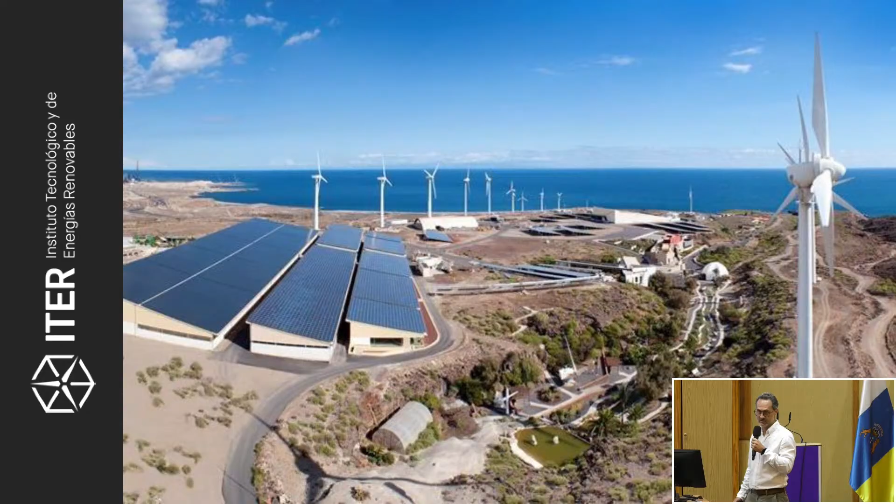We at ITER, I'm gonna start with an introduction of what is ITER for the people who don't know still who is ITER, and that may be a lot of people. And then we are going to focus on what we do at the Robotics and Automation Unit at ITER, focused on renewable energy. For those that don't know, ITER is a technological institute. It's a research and development center located in Granadilla de Abona, Tenerife, south of Tenerife. And nowadays, it represents the main institution of public research, along with the University of La Laguna in Tenerife, in terms of renewable energy.

We are 180 people working there, and we started mostly with renewable energies. Our core is renewable energy, but we have expanded through the last 10 years to other fields or areas. And right now, we not only work on wind or PV energy or storage, but we also have several lines of activity in ICT, sustainable architecture, genomics, and environmental sciences. And one of the last ones that has been started is robotics, that we started in 2018.

Okay, so as I said, our core is renewable energy production. We manage over 40 megawatts of solar power and 60 megawatts of wind power energy. And we do the operation and management of those resources. At the same time, we have a very unique smart grid at the facilities of the Granadilla site, because we have lots of different types of consumption, production, and storage units. So it's a very good place to validate technology in there, because we have low-level control of everything. For example, we produce our own solar inverters. We have very low-level control of everything, up to the electrical signals.

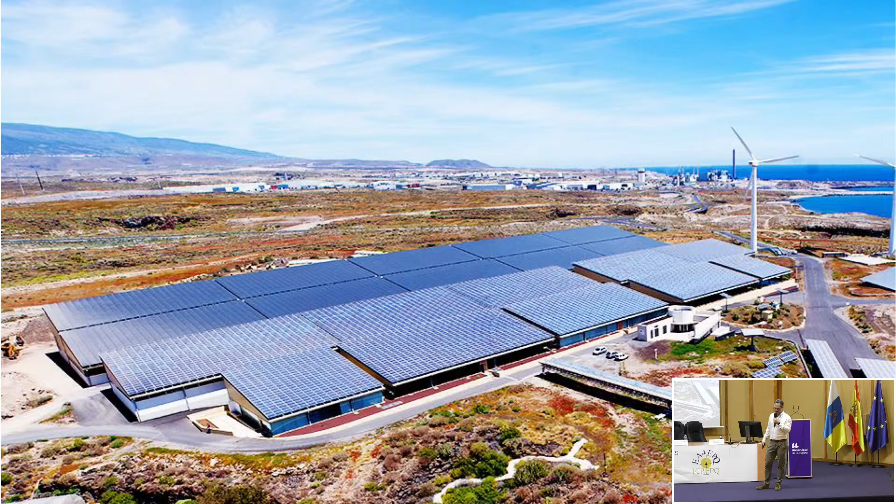So, well, these are the main new wind parks that we have installed, three of them in 2018, and 3 of them were before that and are at the end of their life, 25 years, 35 years of production of wind energy. It was the first wind energy park installed in Tenerife. And right now we are working on repowering, doing the whole reinstallation of all the wind turbines on those three parks. Also, we have deployed 40 megawatts of solar power.

Those that are showing there are in the Granadilla site. These are offices below there and storage sites. And also, this is really beautiful. It's the bioclimatic house residential area that is also located in the Granadilla site, and it's also a living lab that is completely equipped with lots of sensors to measure information about the conditions of the people staying there.

And well, as I said, in 2018 ITER decided to create a robotics unit, and I was chosen to be the leader of that unit. It's focused on robotics and automation. We started with what people normally think about robotics, physical robots. We started doing that at the very beginning, but as time has gone by, we have oriented towards the application of artificial intelligence, because it's what is more applicable to renewable energies right now, and is what the market and the requirements of the business or the entity were focused on.

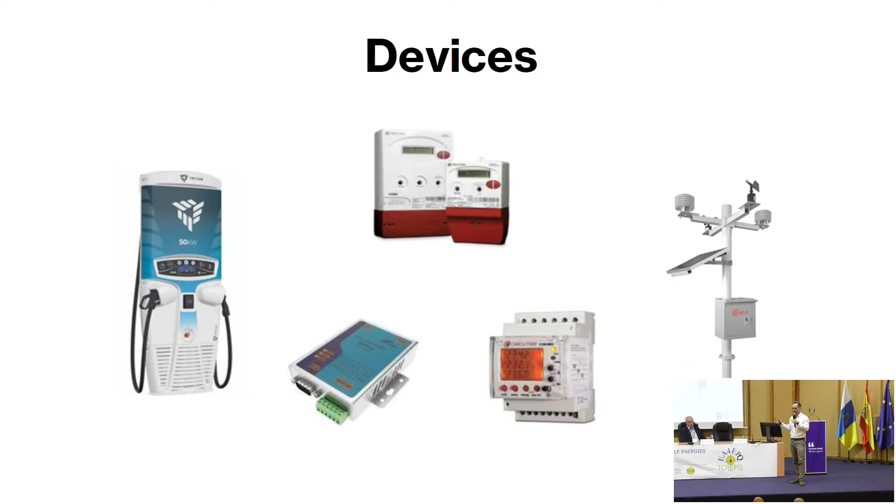What we faced was very different devices. EV chargers, energy meters, different gateways, different network analyzers, meteo stations, water meters, any type of environmental sensor you can think of. It was very difficult to gather all that information and to speak to all these devices with different protocols. But for us, the work was trying to connect with them. I mean, once we connect with the device, everything will be clean, everything will be transparent, and we will transfer the information in the same way to the system. Information and data will be stored, and that information will be available with the same endpoint, with the same interface, independently from what the device is.

So you can imagine what we had in mind at that time, more than 1,500 devices that we had to put all together in one place. So what did we decide to do? Well, we started what was a project at that time, and now it has become a service of the entity, where we do all the data acquisition, monitoring, and visualization of data. It is what we call right now Nexo, and there is a list there of all the things that we gather information from. Okay, so right now, as I said, more than 1,040 devices, more than 65,000 variables, and it's generating nearly 10 million messages an hour. It's a massive amount of data.

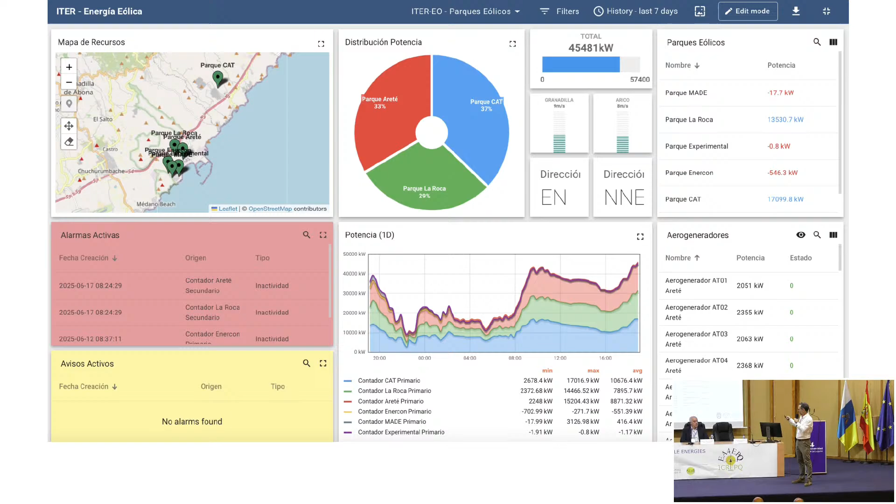And then we go from high level in terms of plant to low level, in this example, into the wind turbine. So we get a view of the whole plant and then go deeper in the analysis, up to the wind turbine. This wind turbine information is gathered through another external SCADA.

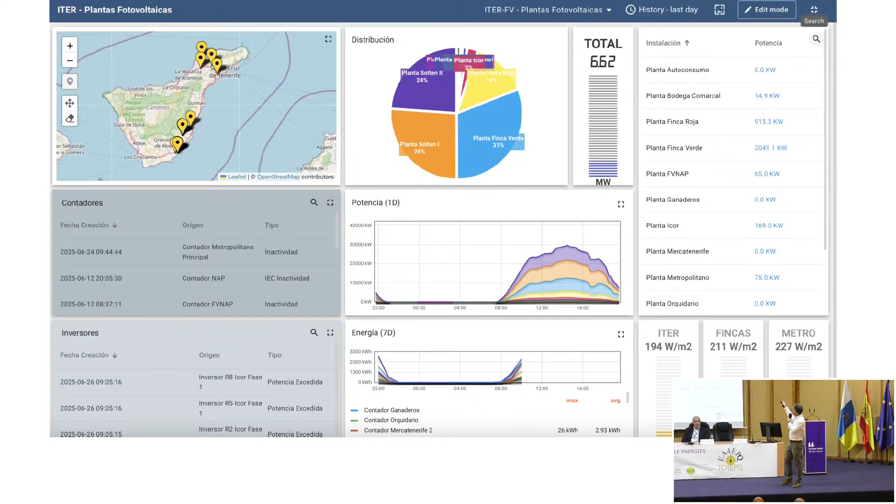For example, on photovoltaics, we have the same view as you saw before in wind energy: we see all the distribution, all the location of the park, all the incidents or issues, production of the last day, of the latest week, and also real-time resource availability and production. Then if we go inside one of the plants, we can see meters, we can see rooms, as we call casetas, where we store the inverters. We can see the status and the production of every inverter. And we can see 3 days of power production.

And it's very interesting because we see at the same time the resource, the production, the estimation of production, ideal production, and also the limitation that the energy operator provides us. Here in the Canary Islands, we have a very big problem with power limitations right now. Right now we are at about 17 to 20% limitation of power. And this is a big issue for power producers, as ITER is. In the case of the PV, we also can see internal information of the inverter because we manufacture our own inverters, so we have low-level access to every electrical data.

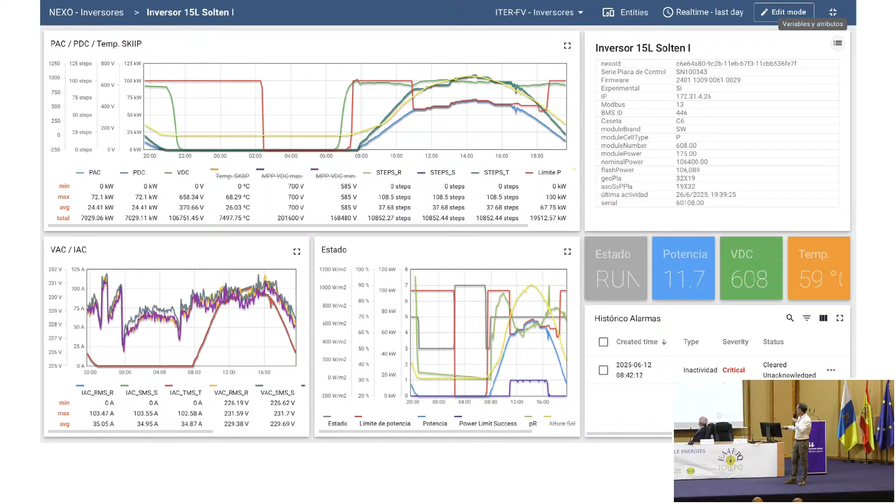And I'm going to focus on this one because it is very related to some work that the University of La Laguna is doing. This is the production time series of an inverter, but at the same time we see the resource that is in yellow, and we have been working in the last 3 months on performing PR calculation on a minute basis. It is normally made on a daily basis; we are doing it on a minute basis. And this information is becoming very interesting for us because we do not have to wait until the next day to know if the inverter is having a good performance, independently from the solar irradiance. We can know that in real time. And we are getting very good results, and maybe we're going to work on publishing a paper on that methodology.

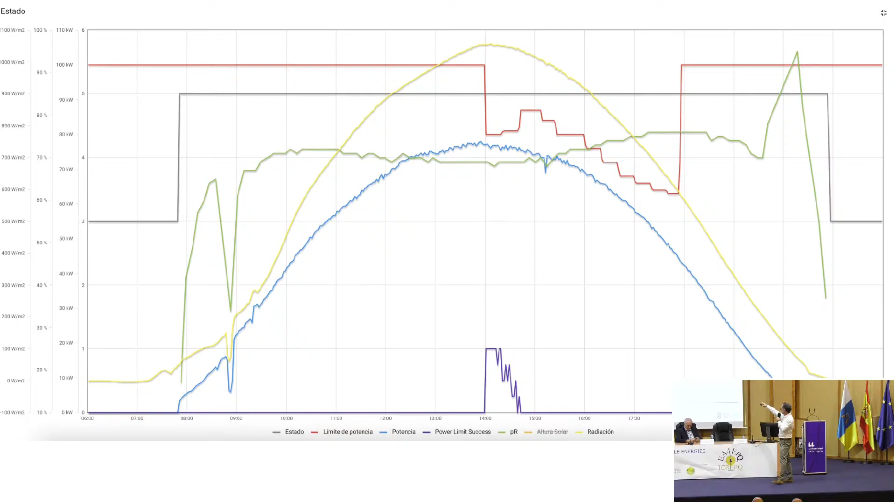As you can see here, the other signals are the limitations and production. As I say, the green one is the PR. Also, we gather information from weather stations. We have here a comparison of all the weather stations that we manage. All those charts that you see there are expandable, so we can see them in full screen. And we can compare the wind resource or the solar irradiance resource in every site where we have a plant or a park.

Also, we get data from outside. I mean, we get data from the operator. We get open data from the operator, so we can simultaneously see what we are producing, what the energy demands are, and also what the energy distribution is producing right now. So it's very important for us to know what's happening outside, to know if we are going, for example, to receive any limitation. That is really useful. And we support that analysis on open data provided by Red Eléctrica de España.

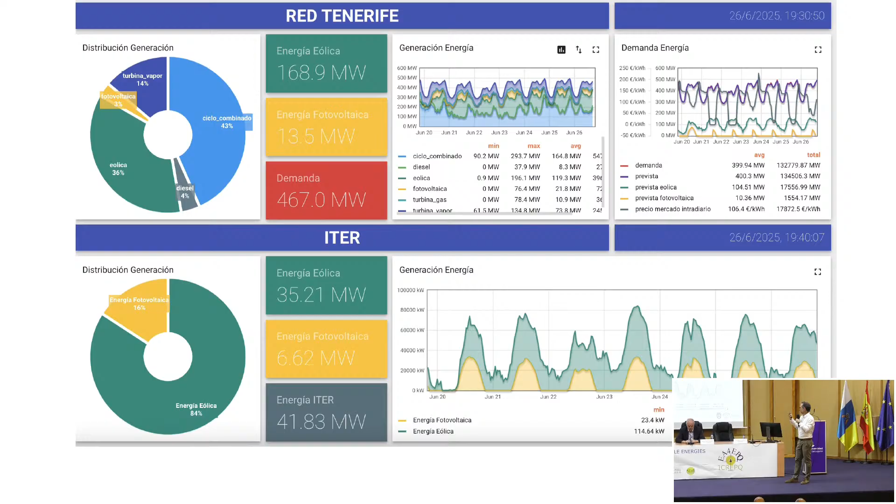This is another panel that is mostly for dissemination purposes, but it shows our production during the last year, during the last month, distributed by technology, by plant, and also with some indicators. And there is one big indicator here: right now between 25 and 30% of the energy produced in Tenerife is produced by ITER. Renewable energy, not the whole energy. But in terms of renewable energy, nearly 29% is produced or managed by ITER.

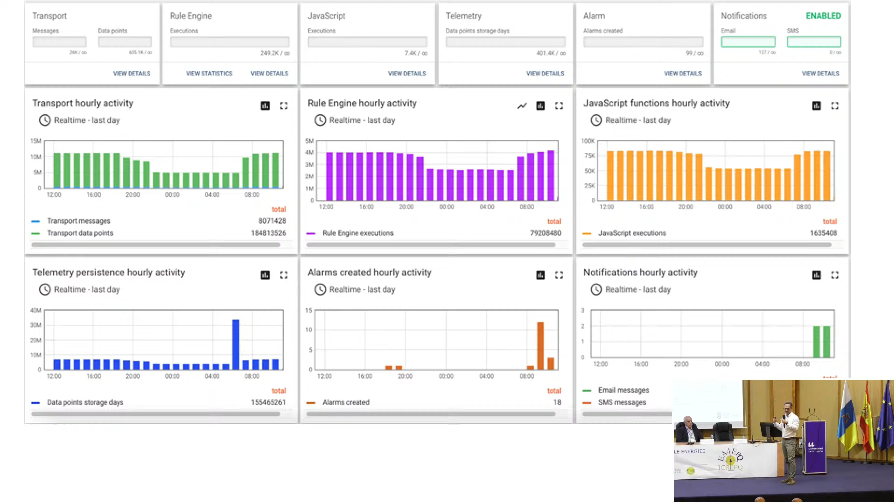This is a screen that tries to show the amount of data that we are handling right now. As I said before, we have lots of data. Normally we are at about 8 million messages per hour, and at some times of the day we have peaks like that because we receive lots of data at specific times. But it's manageable. Our system can accept 25 million messages in just 1 hour. And it could accept much more than that, because thanks to our own HPC infrastructure, we can scale.

Now I'm going to focus on the data exploitation, okay? Delphos is a project about forecasting of all the energy-related time series. Red Eléctrica de España imposes that any energy provider with an installation of more than 1 megawatt has to provide a 48-hour production forecast of that installation. So right now we are generating on a daily basis 70 1-hour forecasts of wind and solar energy production.

And you can see in the dashboard, well, here it's all mixed because we need to do this visualization. Here you see the real power. Here is forecasted power, using different models. There are different machine learning models that we use, and on a weekly basis we compare all of them. We compare the results and we balance the use of them. So it's not all the time using the same model. We combine them. And this view is very interesting because we can see what we expected to produce today, what is expected to be produced during this week, and what is expected in real time, okay?

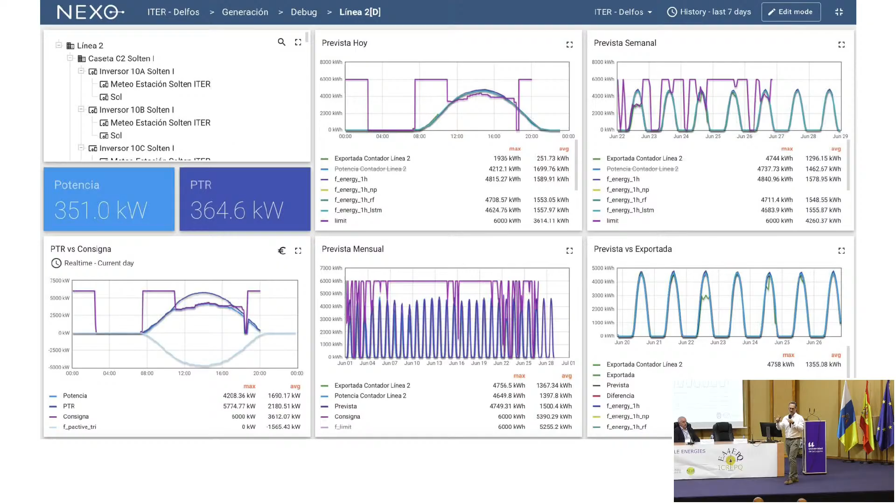And this is a big issue because the bigger the difference with the forecast, you get economically penalized. So if the difference in the forecast is very big, you get a penalization. And that penalty is becoming an issue. It's quite a lot.

Here you can see in detail, and this is the limitation. The forecast is the purple one, and the production is the green one. So in terms of solar, we are doing very good work. In this graph, for example, this is a week. The only day that we had a big difference was due to a limitation, not due to a forecasting problem. So in this area right here, we don't get penalized, because it's an external limitation. What we get penalized for is this type of thing. This, for example, may be a 3-hour cloud that we didn't expect to appear. The difference is very small, but it's important.

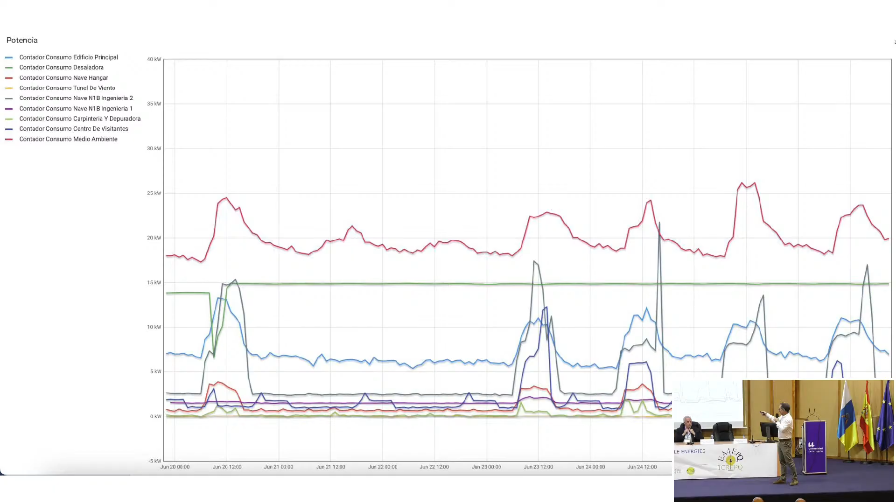And also, we do forecasting on consumption. This is also very nice because we can estimate 48 hours in advance if we are going to have lots of consumption. And our consumption profile is mostly related to air conditioners, because most of our facilities are bioclimatic, but some of them are not. So we need air conditioning mostly on summer days. But here we have a combined forecast of all the consumption points in the area.

Another thing that we also do in the robotics and automation unit is aerial inspection of wind and photovoltaic energy infrastructure. We use drones to get data, not in terms of time series, but in terms of images, mostly using thermal imaging. We use this type of drone. We do periodical flights through the whole installation of PV plants.

Flying one PV plant takes about 15 minutes. We need to fly around 450 PV plants during the whole year. It's quite an issue because there are lots and there are distances between them. So we repeat every flight every 2 years. We cannot do more than that with 4 people doing that.

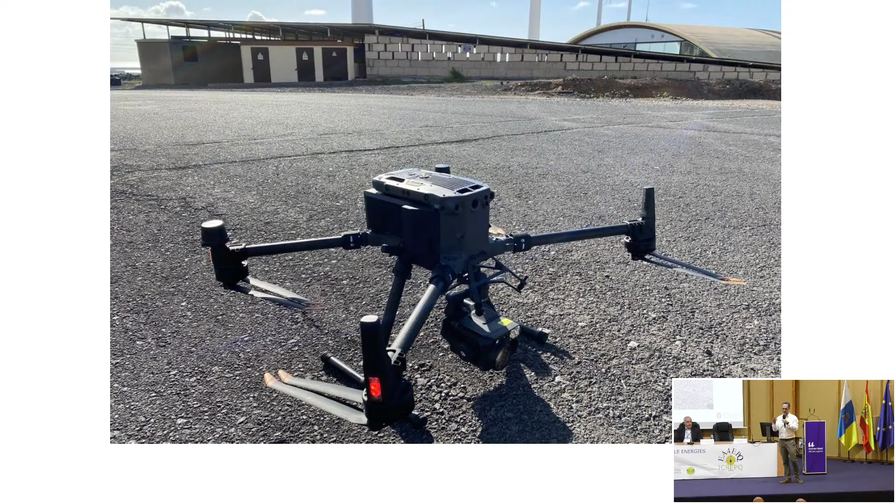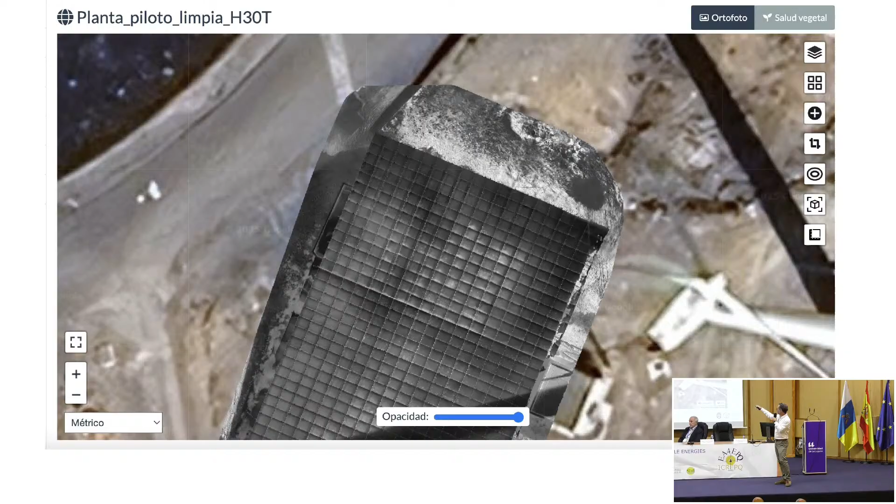Because when the solar radiation impacts the surface, it is different. The irradiation of the panel is different when it's dirty than when it's clean. And we are working on a project that I'm going to speak about later that is focused on this issue.

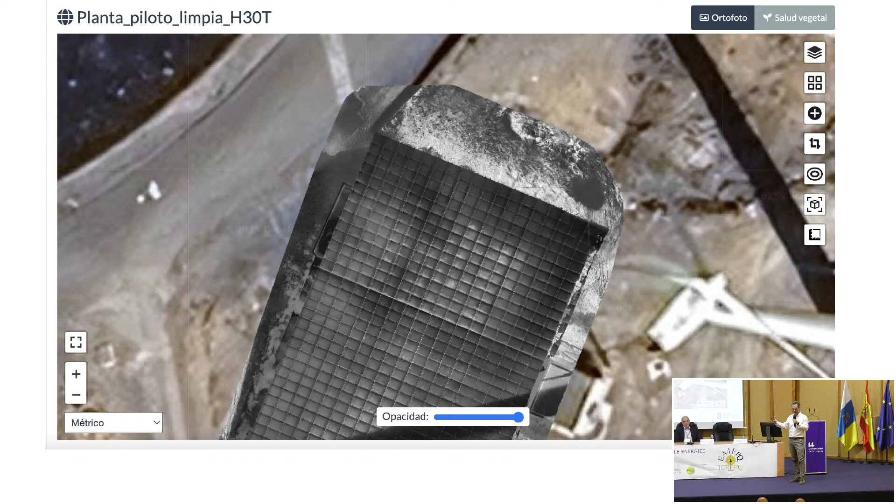We have lots of problems with PV cleaning in Tenerife because we are in a very critical place that has plenty of wind, very close to the sea, with lots of salitre, that is concentration of salt, and that mixed with dust is the worst thing for PV.

We also do the same approach on wind turbines, and we gather thermal and RGB imaging of the wind turbines. There are some studies, and we are also applying it, showing that in some cases you cannot see, for example, breaks in the fiber visually, but if you get the thermal imaging and there is enough heat on the surface of the blade, you can see the break, even if it's not visible.

And we are using it to get in advance to a replacement or a fix of that blade. This is what we are very happy to be working on right now, and I think it's going to be impactful for you. We are applying Gen AI. ChatGPT is the daily basis for most of us. I don't know if it's for you, but for us it's the daily basis using GPTs.

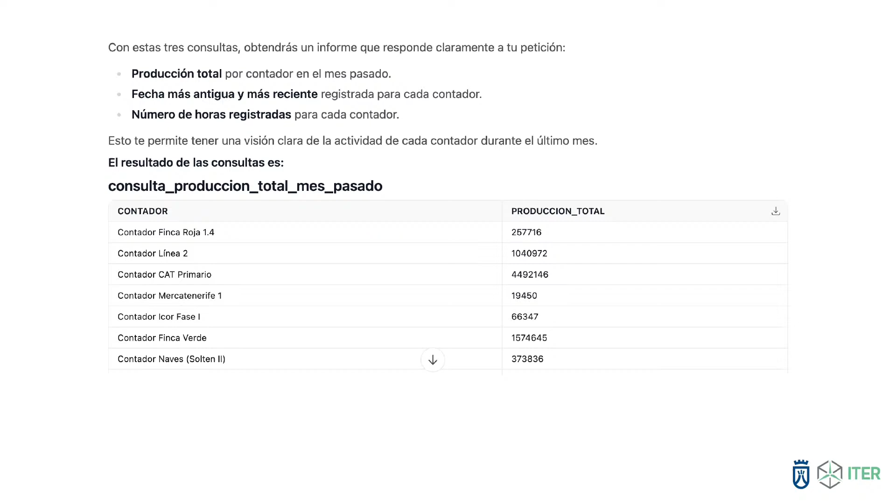It shows us the results of the queries that it has automatically created, and then at the very end, it automatically generates a report of energy production per meter of the last month. And well, it's very long. I'm just going to give you a sneak peek. This is just the introduction. It's a 10-page report.

And well, I wanted just to show you that we have just asked one sentence: total production of the last month per meter. This is the only thing that we provide to the system. And the system answers with a 10-page report with 100% precision. And it's very good because there is no human interaction in here. So these kinds of systems, when they interact with numbers, are very good. And also the conclusions are not bad.

If we are not okay with something in the report, well, okay, we can download it as a doc and we can edit it. But we do not have to build, for example, a monthly report of every installation from zero. So that gives us peace. You remember we were in chaos. Right now we are in peace. Not total peace because there are lots of things, but now, in terms of data, we are in peace.

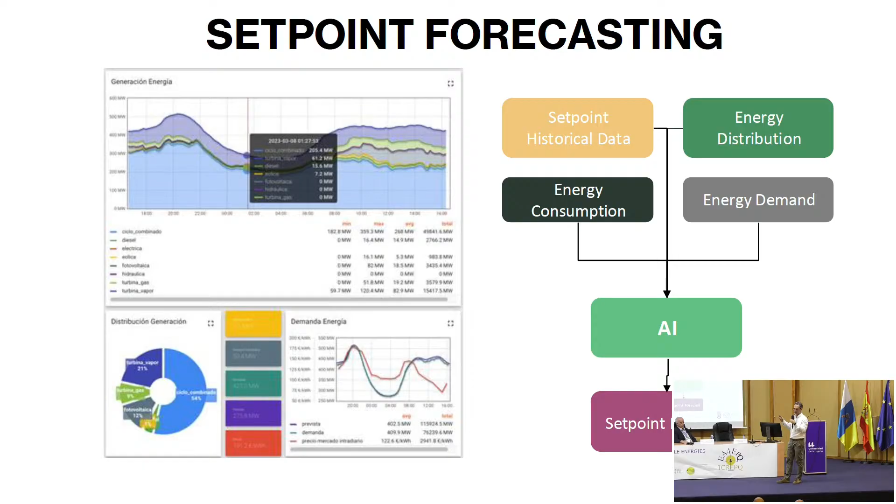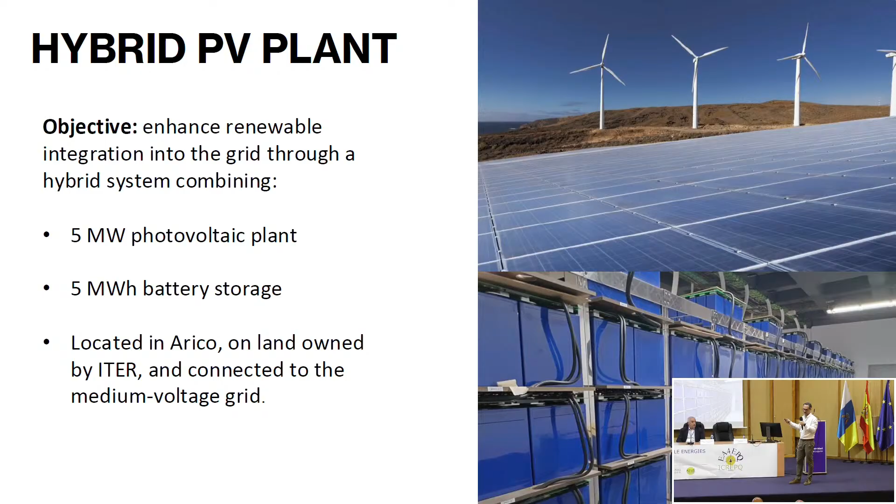Sorry. And then the last two things that we want to speak about is a hybrid PV plant that is going to be installed just before the 30th of December of this year in Arico. It's a 5 megawatt photovoltaic plant with 5 megawatt-hour battery storage. It's going to be the first one installed in Tenerife in hybrid technology. And the last is maybe a big project, an agro-PV plant that we are working on with Cabildo de Tenerife to install a 200 kilowatt peak plant in vineyards in the area of Tegueste. Okay, so that's all. Thank you for your attention.

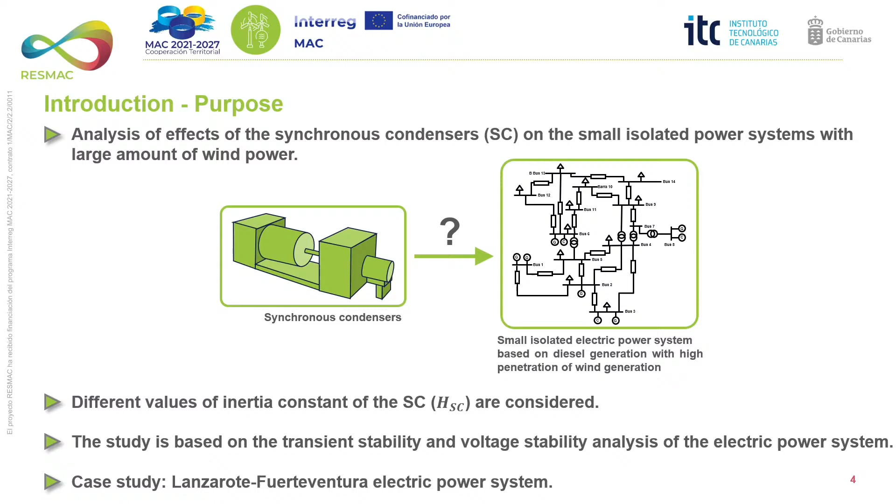The synchronous condenser, also known as synchronous compensator, synchronous capacitor, or SYNCON, is basically a synchronous machine connected to the grid without prime mover or mechanical load. Synchronous condensers have been used in power systems since 1930. However, they have gained importance in recent years due to their capabilities that favor the integration of renewable energy into the electric power system.

Some of those capabilities are generation or consumption of reactive power to help the voltage control in the power system, and the inertial response. They can provide inertia to the power system, as well as contribute to the short circuit capacity.

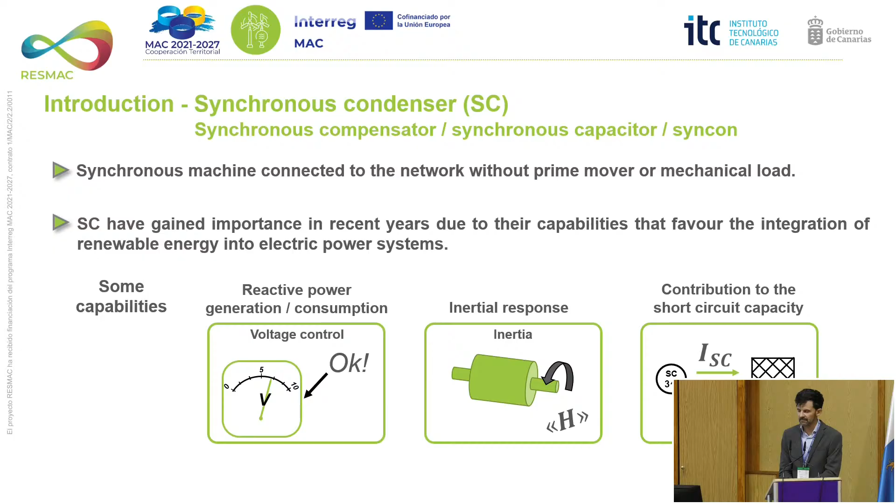The Lanzarote-Fuerteventura electric power system is located on the Spanish islands of Lanzarote and Fuerteventura. The power system on Lanzarote Island is connected to that in Fuerteventura Island by two submarine power cables. There are basically two rated voltages at transmission level, 66 kilovolts and 132 kilovolts. Both islands have a conventional power plant based on diesel generation units and gas turbine generation units. The total conventional power installed is 541 megawatts. The total wind power in the power system is around 97 megawatts.

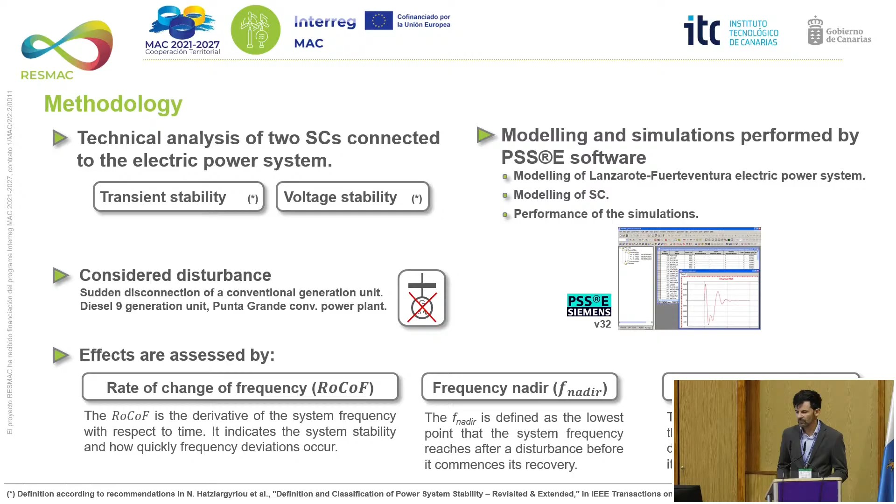The methodology. The methodology relies on transient stability and voltage stability analysis of two synchronous condensers in the electric power system. The modeling of the Lanzarote-Fuerteventura power system and the synchronous condensers, as well as the simulations, were carried out using PSSE software. The disturbance considered for analysis is a sudden disconnection of a conventional generation unit belonging to the conventional power plant on Lanzarote. The effects are assessed by the rate of change of frequency, nadir, and minimum voltage.

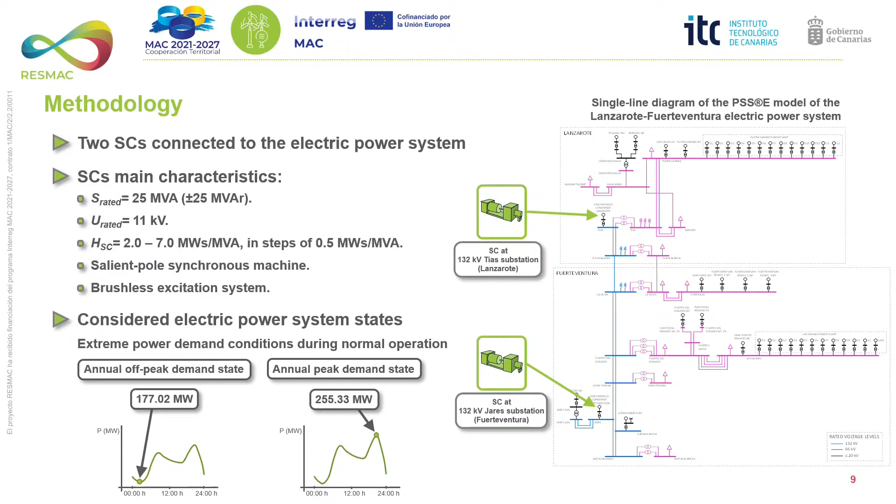The two synchronous condensers are connected to the power system, as you can see on the right side of the slide. One of them is connected to the power system on Lanzarote Island, and the other one is connected in Fuerteventura Island. Synchronous condensers are salient pole synchronous machines with a rated apparent power of 25 MVA. So, the synchronous condenser can inject or consume reactive power up to this value. A range of inertia constant of the synchronous condenser is considered from 2 seconds up to 7 seconds.

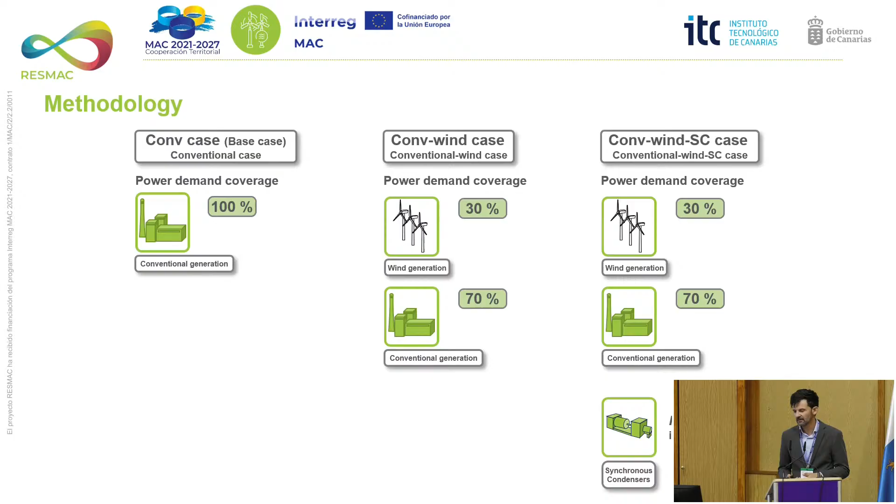The system states for analysis are the stressed power demand conditions in normal operation: annual peak demand state and annual off-peak demand state. So, given the above, 3 cases were studied. The first one is called the conventional case: all of the power demand is covered by conventional generation. The second case is the conventional wind case: 30% of the power is generated by wind generation, and the rest is produced by conventional generation. The last case is called the conventional wind synchronous case: the power demand coverage is the same as the previous case, but synchronous condensers are connected with their different inertia constant values.

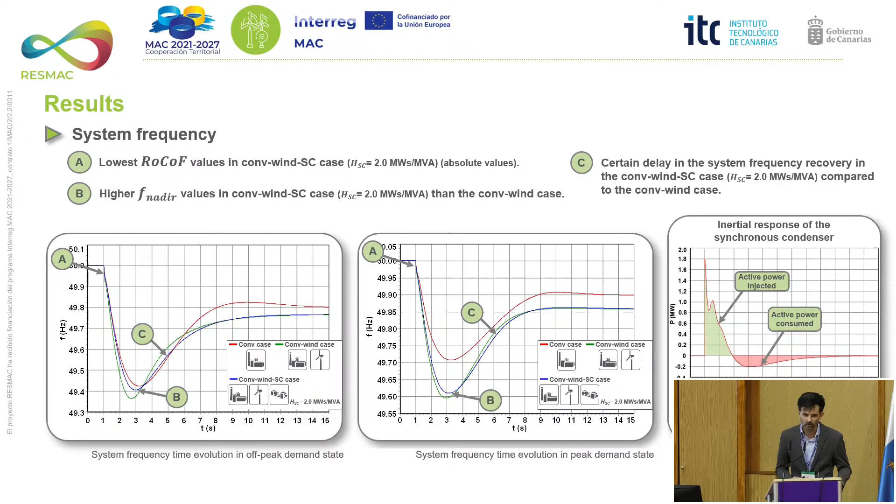Now we can compare the system frequency time evolution for the synchronous condenser case. The results show the lowest rate of change of frequency and a higher frequency nadir for the synchronous condenser case than the conventional wind case. On the other hand, a certain delay is also observed in the system frequency recovery when the synchronous condenser is connected compared to the conventional wind case. This system frequency behavior is due to the inertial response of the synchronous condenser. When the conventional unit disconnects, the synchronous condensers inject active power to the grid from their rotational kinetic energy. After that, the synchronous condenser consumes active power from the grid in order to restore its rotational kinetic energy.

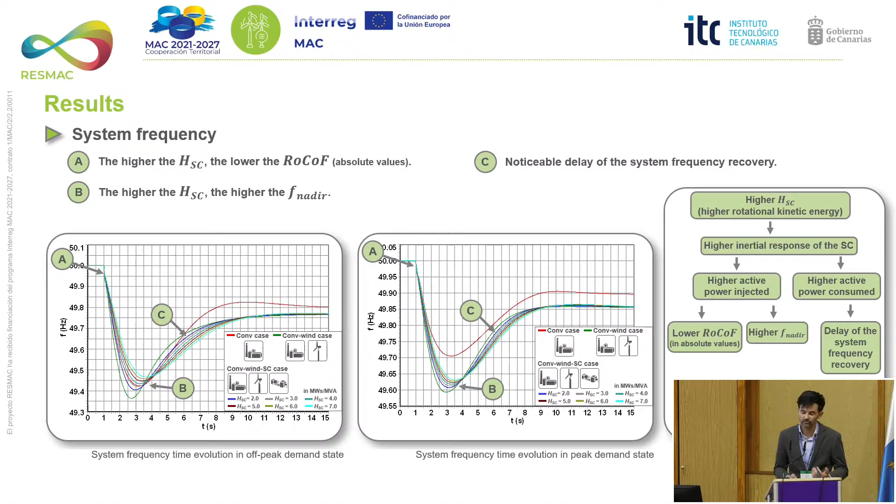The results for the range of inertia constant values of the synchronous condenser suggest lower rate of change of frequency values and higher frequency nadir values when the inertia constant of the synchronous condenser is increased. Besides, the delay in system frequency recovery is more noticeable. The reason is that a higher inertia constant of the synchronous condenser means higher rotational kinetic energy, so the inertial response of the synchronous condenser is also higher, and this produces those results. It should be noted that the relationship of rate of change of frequency and frequency nadir with the inertia constant is not linear.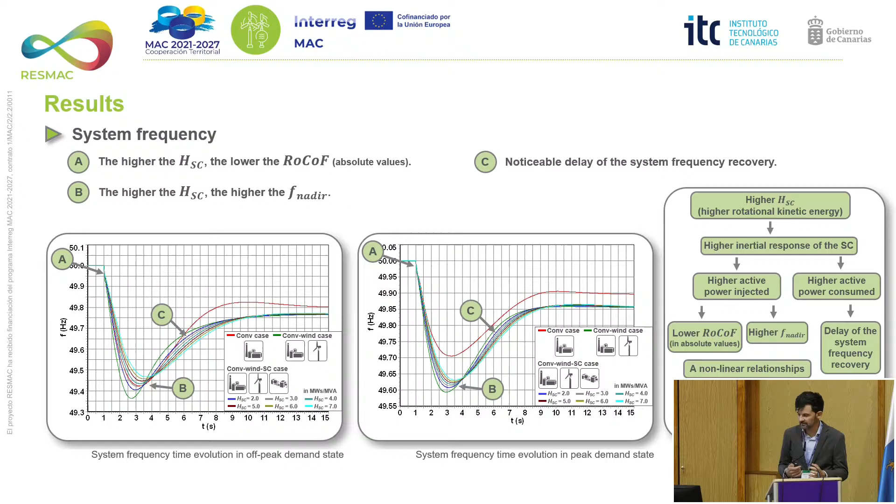It suggests this is not a linear relationship, and suggests the existence of a technical-economic limit for the inertia constant of the synchronous condensers. With regard to voltage, the time evolution for some transmission busbars is presented for both the conventional case and the conventional-wind case.

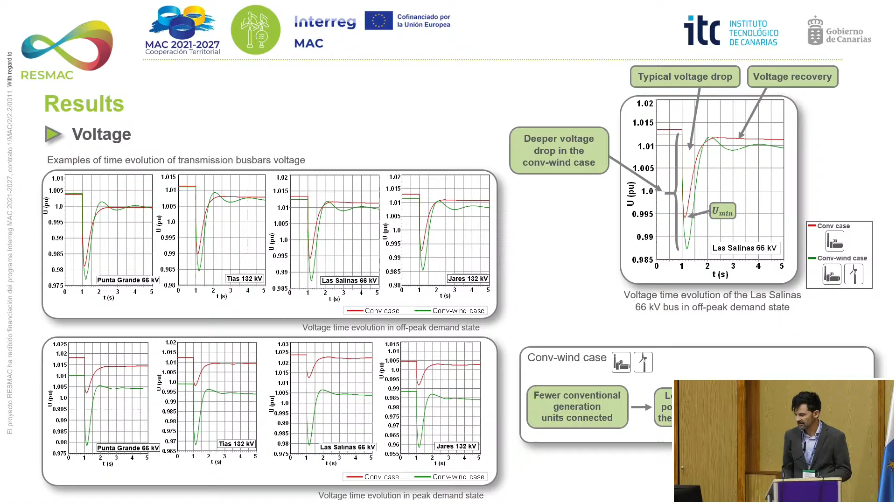When this conventional generation disconnects, a voltage drop appears throughout the small isolated power system. After that, the voltage recovers. The voltage drop is deeper in the conventional-wind case. The reason is that in the conventional-wind case, there are fewer conventional generation units connected to the grid, so it brings lower reactive power control.

The voltage drop is less severe when the synchronous condenser is connected to the grid. Synchronous condensers can provide their reactive power control to the power system. So when the conventional generation disconnects, the synchronous condenser increases the reactive power to support the voltage in the power system, and it causes a smaller voltage drop. Results also indicate that the different inertia constant values considered did not have significantly different effects on the voltage of the power system. The conclusions.

The findings indicate that the synchronous condenser caused a reduction in the rate of change of frequency values, as well as a higher frequency nadir value. Therefore, a reduction in the system frequency excursion can be expected when a disturbance takes place in the power system. A certain delay in the system frequency recovery is also observed, so we must take into account this delay because it may lead to a significant negative impact on the power system.

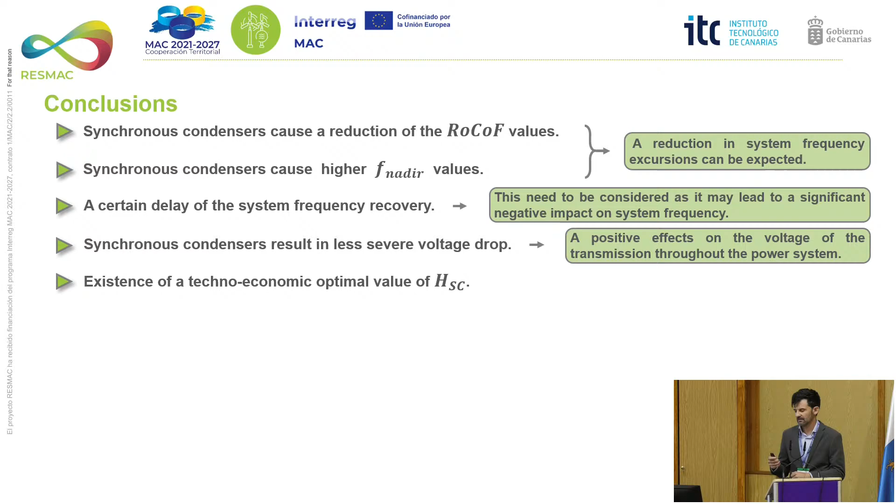Synchronous condensers result in less severe voltage drop throughout the small isolated power system, and the findings also indicate the existence of a technical-economical optimal value of the inertia constant of the synchronous condenser. Based on the positive findings, we can affirm that the synchronous condenser could contribute to the improvement of reliability and stability of the small isolated power system integrating renewable energy. For that reason, the synchronous condenser could be considered for increasing the integration of renewable energy into a small isolated power system.

Possible next steps could focus on the study of the optimal rated power of the synchronous condenser, the optimal value of their inertia constant, the most suitable location for these devices, and analysis of other disturbance conditions in the power system.

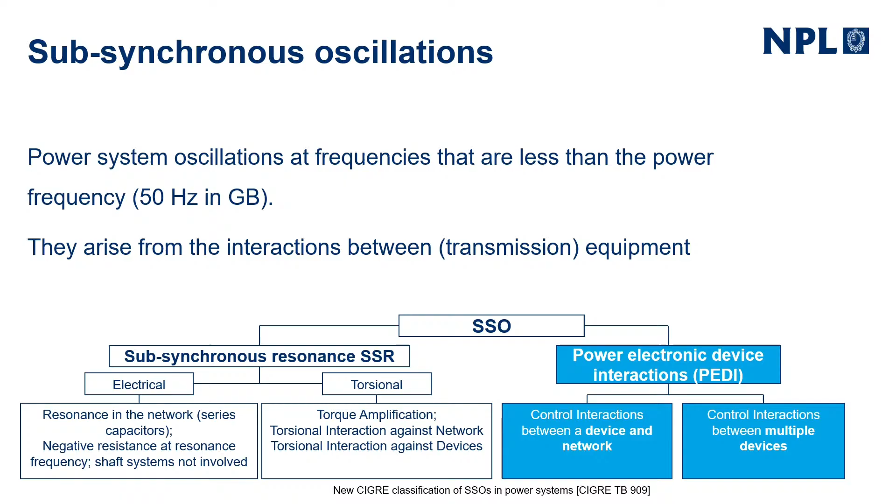Good morning, everyone. My name is Stefano from the National Physical Laboratory. My presentation today is about the detection of subsynchronous oscillations in power systems. Subsynchronous oscillations are power system oscillations at frequencies less than the system frequency, so less than 50 hertz in Europe. They usually arise from interaction between equipment, and they are usually a concern in the transmission system.

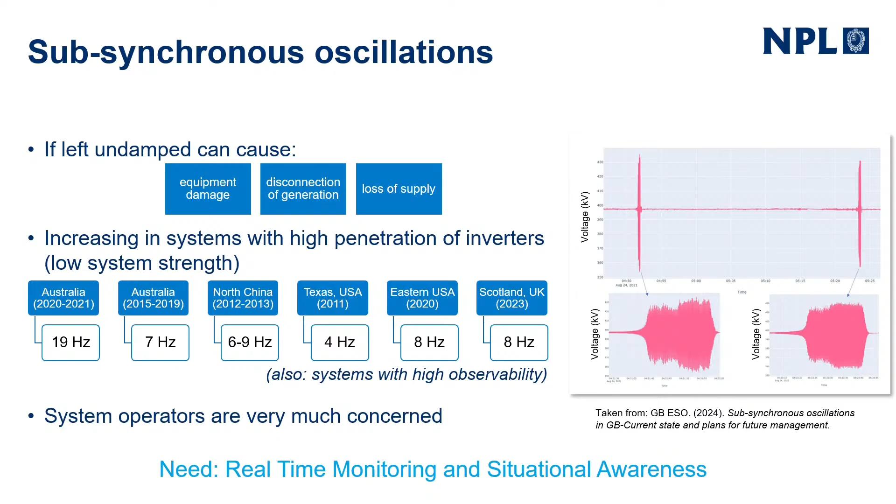Traditionally, they would originate from electromechanical interaction, but more recently we're seeing the occurrence of oscillations due to the interaction between power electronic controllers, so they're very much related to renewable generation. They're quite dangerous. If they're not damped, they can cause damage to equipment, they can cause disconnection of generation, and in the worst case scenario, they can lead to a loss of supply.

We're observing increasing occurrence of such oscillations, especially in systems with a high penetration of inverter-based generation, so renewables. So Australia, Northern China, Texas, Scotland, systems where the system strength is going down. Here, these are some examples of oscillations detected in the last 10 years. And this is an example of how they look like.

This is an example from the GB, Great Britain National Grid, of a couple of oscillations that occurred in Scotland 2 years ago, about 8 hertz. System operators are very much concerned by these oscillations, and they do have a need of having more situational awareness and increased real-time monitoring capabilities.

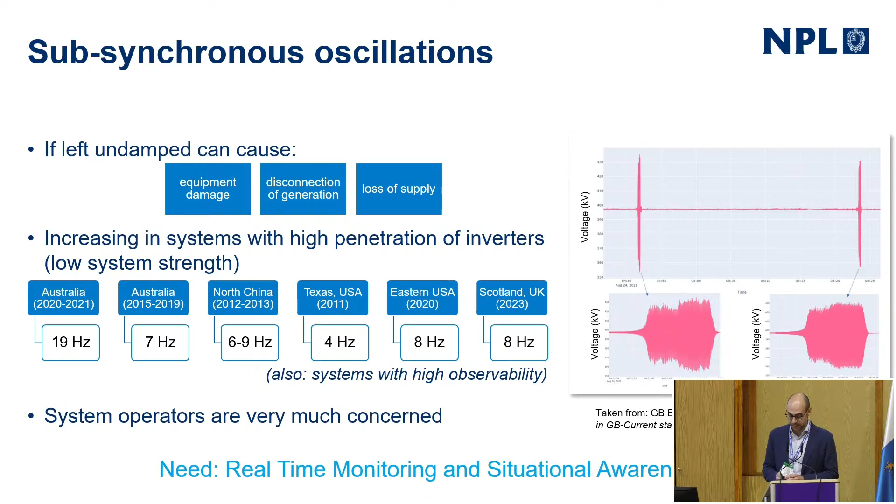Currently, the way to see these oscillations is by using instrumentation that is already deployed in the system. So that was not designed for oscillations, but it's already there. So one way is to use digital fault recorders. They can provide a very high sampling rate, so they can give you the voltage and current waveforms, but they don't have real-time capabilities. So they're not really useful for early actions.

The only viable option currently is to use phasor measurement units, PMUs. They do have real-time capabilities. They are GPS locked, but they don't provide you with the waveform. They only give you a phasor, which is something that is more or less proportional to an RMS value.

This is a typical measurement chain. Here you have the grid, what you want to measure. So you would have some sort of instrument transformer, and then you have a digitization stage. So this is where the PMU is. And then another stage, which usually is inside the PMU, your detection algorithms, your characterization algorithms. And then you can get some visibility of oscillations.

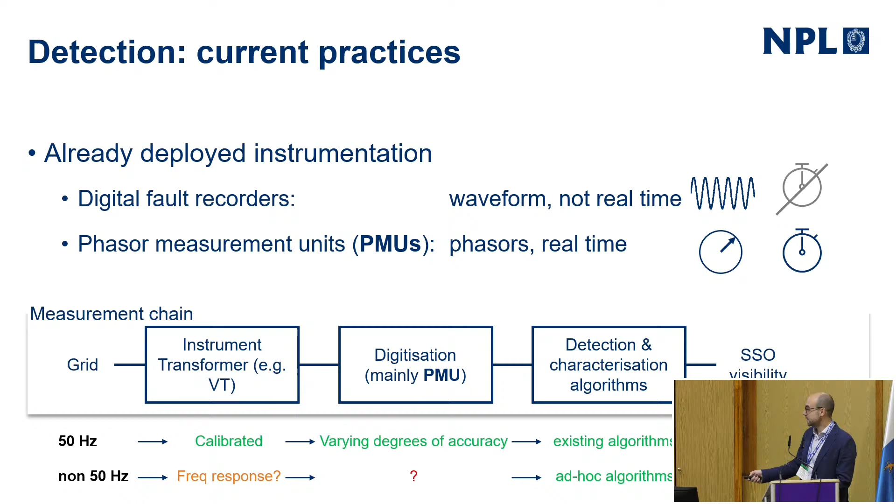Now, this measurement chain, when you work at 50 hertz, it's quite okay. Your instrument transformer usually is calibrated, so you can trust it. PMUs, there's a standard. They come with a stated accuracy, so you can trust the result at 50 hertz, and then there's a variety of algorithms, so all works fine at 50 hertz.

When you go away from 50 hertz, despite having very good algorithms for the detection of SSOs, subsynchronous oscillations, there are some issues. Your instrument transformer, you don't really know how it behaves, what's the frequency response, especially if you're far away from 50 hertz, at very low or very high frequencies.

PMUs, we don't really know how they behave at 5 hertz, 8 hertz. So even if you have a very, very good method, if you cannot trust the input data, there's a question on whether you can trust the output of your method. So this presentation is about this stage, about the PMUs and how they perform.

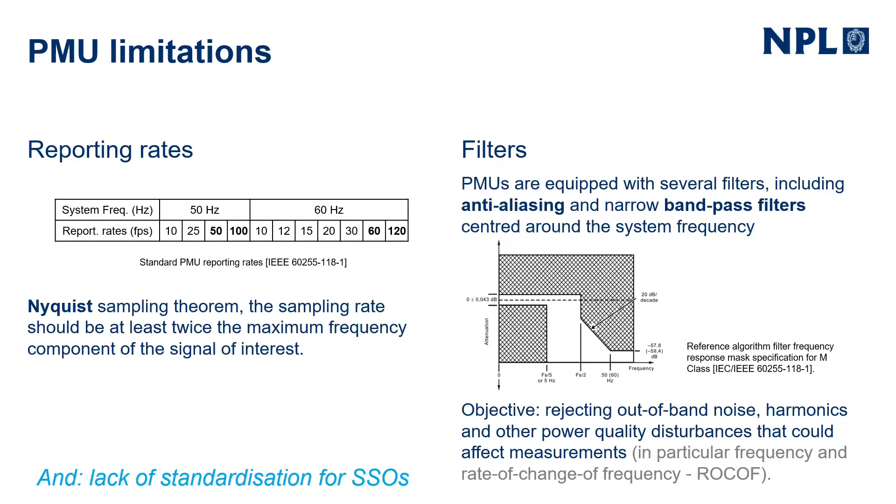PMUs have limitations. One of them is the reporting rate. There's a theorem in sampling theory that says that the maximum frequency you can see is half of your sampling rate, of your reporting rate. And PMUs, for a 50 hertz system, typically report at 50 hertz or 100 hertz. So the maximum frequency you can see is either 25 or 50 hertz.

Because of this, PMUs carry anti-aliasing filters, so they remove everything that is above your maximum frequency to avoid noise. But they also carry other filters. In particular, they have narrow bandpass filters around 50 hertz. This is because PMUs are designed to measure the 50 hertz very accurately and to reject everything else, because everything that is not 50 hertz is considered noise, distortion, and it just affects the accuracy of the measurement.

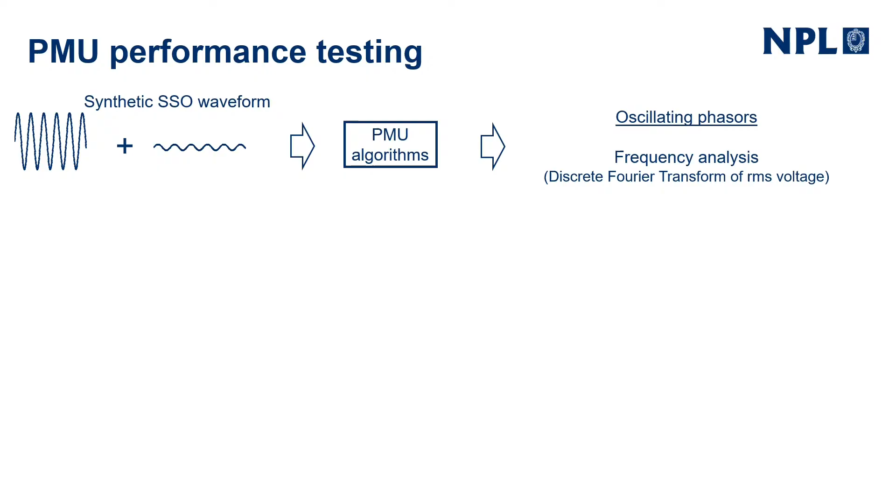So we've done some tests to assess the performance of PMUs. We generated artificial waveforms with a 50 hertz component and an oscillation at varying frequency. And we pass it through PMU algorithms, and we obtain the phasors, the oscillating phasors. And we've done some frequency analysis on it. One of the studies that we've done is the frequency identification.

We've seen that if we create an oscillation of 5 hertz and pass it through the PMU algorithm, the PMU will see something at 5 hertz. So that's what you injected. But interestingly, if you inject 45 or 55, you still see 5 hertz in the frequency analysis of the phasor. That's something known as beating, because 45 and 55 are 50 plus or minus 5. So in the frequency spectrum, you see 5.

A second test we've done is, we try to understand this attenuation, how it works compared to the frequency of the oscillation. So we did a frequency sweep from 1 to 65 hertz. And we tested different PMU algorithms. They're all IEEE standard compliant.

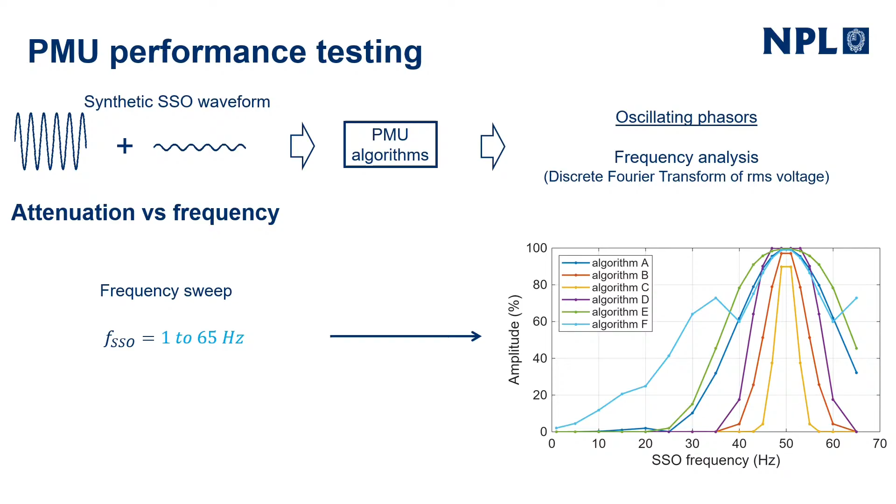So in order to fully characterize the limitation of PMUs, the strategy that we want to use is a comparative approach. So we want to measure oscillation with a PMU in parallel with something more accurate, something that can record a waveform. We have these units that we've developed. They are basically waveform measurement units.

They can sample at very high rates. They are GPS connected. We can implement the algorithms that we want. And they can also operate as a PMU. So this device can effectively perform these two tasks in parallel. And the idea is that we can characterize an oscillation from a PMU and characterize one from a waveform recorder and then compare and see.

The problem is that these sample at a very high rate, and so if we wait forever for an oscillation to occur, we would just store a lot of data that contains nothing. So we had to develop a detector, effectively an SSO detector, to implement on the PMU, that if it detects an SSO, then it would trigger the acquisition of the waveform.

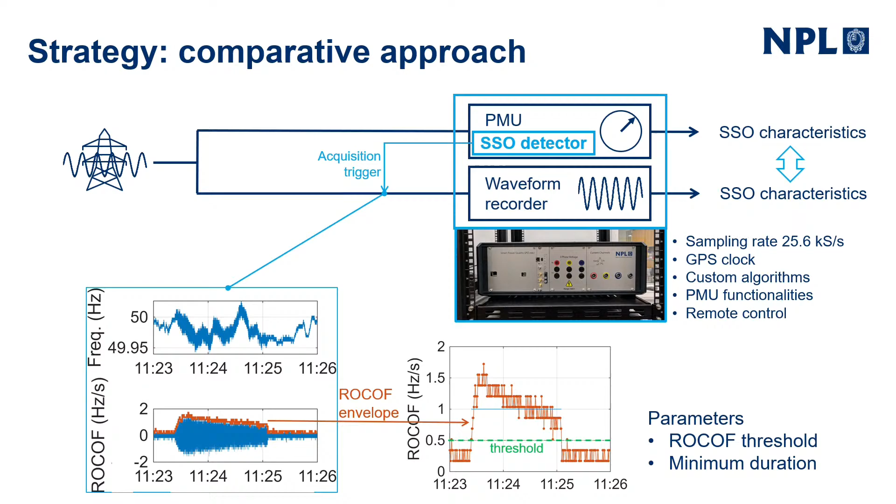And the algorithm is relatively simple, so we define a threshold, and if the envelope of this RoCoF surpasses the threshold and stays above the threshold for a minimum duration, then we say, okay, there's an oscillation, and then we record the waveform. So this detector depends on two parameters, the threshold and for how long it stays above it.

So in order to define these parameters, we did a study. Basically, we tested it with a large number of PMU recorded events. And the objective is to minimize the false positives and false negatives. A false positive is a trigger when there's no oscillation, and a false negative is when there's an oscillation, but you don't trigger. So we found an ideal area here, and then we defined a threshold and a minimum duration.

So we defined a threshold of 0.5 hertz per second, and at least 5 seconds. This is pretty much application dependent, if you can be more or less strict. So once we defined these parameters, we validated the detector with a variety of synthetic SSOs, but also with some real SSOs. These are publicly available from the Australian operator. This is where we are.

The next stage is to take the detector and deploy it in the grid. We already have some of our units on the GB system. We're probably going to start here in Scotland, where the system is weaker, because there's a lot of wind, the network is not very strong. This will allow us to fine-tune the parameters of the detector, and then basically we have to wait for an oscillation to happen so we can collect it.

And then we'll be able to compare the parameters and understand if phasors are enough to characterize these oscillations, what you can extract from a phasor and what you cannot extract from a phasor.

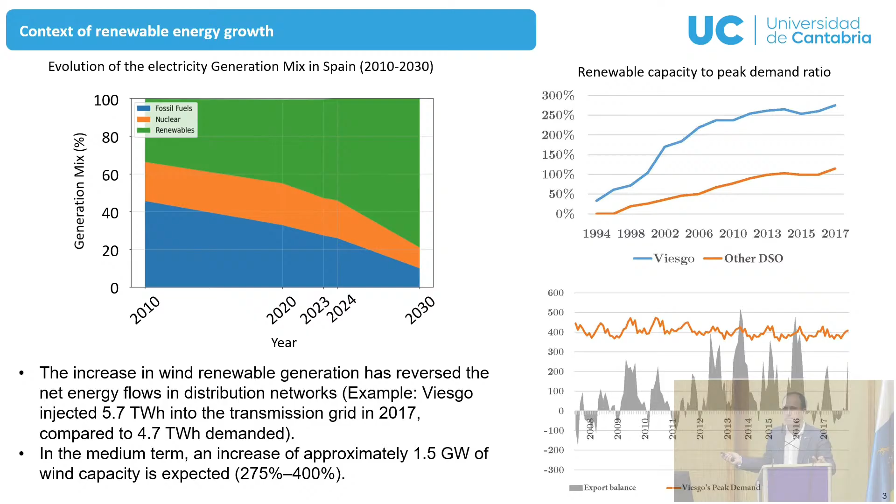I think it's not necessary to explain what is happening with the generation mix, but what maybe is not well known is what is happening with the distribution networks that have to absorb a high percentage of renewables in a distributed way. So just to give you an example, this slide shows the relation between the renewable capacity and peak demand ratio. Not only in several Spanish DSOs, but in the case of Viesgo, the distribution network is becoming more and more close to transmission instead of distribution. So the power flow is moving up instead of down in several areas.

And this reversal of the power flow is not only a concern for the stability of the network, but is also moving the network to the operating static limit. So this is something that is worrying the operators of the networks. In this context, this is not an isolated case. Just to give you an example, two weeks ago, the government of Cantabria published a resolution declaring an environmental impact. This is a very classical resolution; if you browse the official publications, you will find a lot of documents like this one.

But what strikes me is that in the alternatives approved by the government, alternative number one defines that we propose to maintain 15 turbines positioned with a total capacity of almost 50 megawatts, either by increasing the capacity of the existing power line or by constructing a new one. So in this case, the wind farm has been approved before increasing the capacity of the network. This is a common scenario, and it is moving the DSO to a position that is not very comfortable in terms of managing the network.

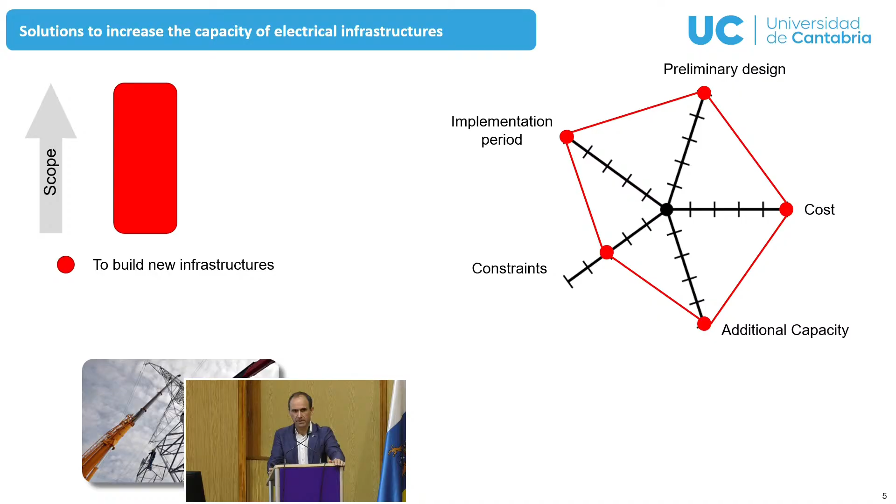three main sets. The first one is, of course, to build new infrastructure, but you know that is difficult. Of course, it's a good solution from the point of view of the additional capacity provided to the system. But if we study the KPIs of the solution in terms of design, cost, and constraints, you know that in general there is a NIMBY approach. Most of society refuses to install new infrastructure. On the other hand, this is not a short process. The time needed is too long.

The second approach can be to upgrade, to repower the existing infrastructure by increasing the voltage, or by updating the conductor using high temperature conductors like ACSS or ACCC. This is a second option. The DSOs are not comfortable with this type of technology. I don't know the reason, maybe because they don't have a history of using it.

And the last one is dynamic line rating. Dynamic line rating is cheap in terms of overall cost, because it can be considered less than 2% of the cost of new infrastructure, and in addition it can be implemented quickly. Of course, it is not a general solution, but in areas where the distribution network is radial and the wind farm has to be integrated into the grid, more wind means more cooling, so these techniques can be suitable.

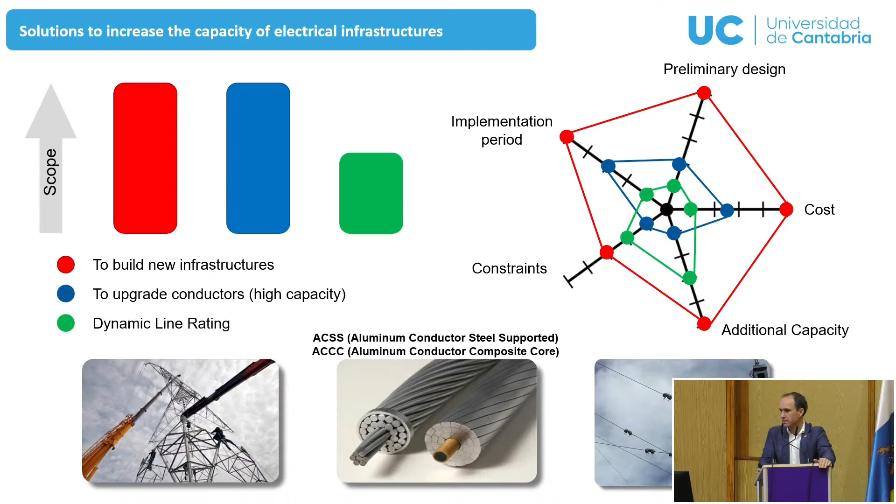Okay, so we will focus very quickly on this approach. For those of you who are not familiar with this technology, what is dynamic line rating? It's basically considering the thermal balance in a conductor, in which heat is gained mainly because of Joule heat, but also because of solar radiation, and magnetic and corona effects with a very small contribution. On the other hand, we have the heat loss, basically convection. And convection can be increased when there is wind removing the heat from the conductor.

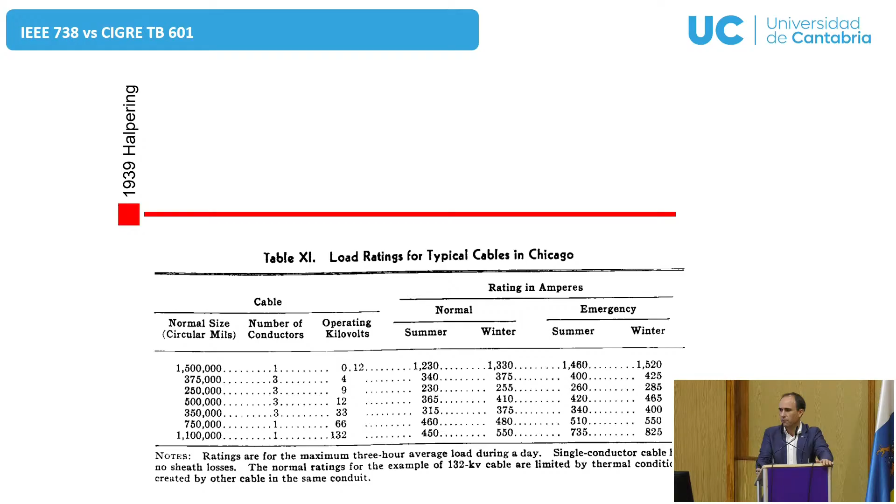So this is in steady state, and if we consider the transient, the only thing we have to add is the mass of the conductor and the specific heat capacity of the conductor. So this is the general approach. This is not new. This is as old as the history of conductors. If we review the state of the art, the concept of rating is as old as 1939. After several improvements, dynamic line rating appears as a concept in 1962, more or less. So this is not a new

concept. Nowadays, the documents that define in a standardized way how to do it are mainly IEEE 738 and CIGRE Technical Brochure 601. Both documents are devoted to aluminum conductor steel reinforced. One of the aims of the platform we have developed is to test other types of conductor, such as high temperature conductors, to know if these standards can be extended to them. One of the objectives of this facility was to compare the standards. If you are interested, we have some publications on this topic, so I am not going to extend.

And that is the facility. It's a very simple setup with a loop in which we are able to test real conductors with a maximum current of 2,000 amps, with a very low voltage, because we are interested only in the Joule effect. But this platform is not only for testing conductors. It can also be used for testing temperature sensors or other technologies needed to put this technology to the test.

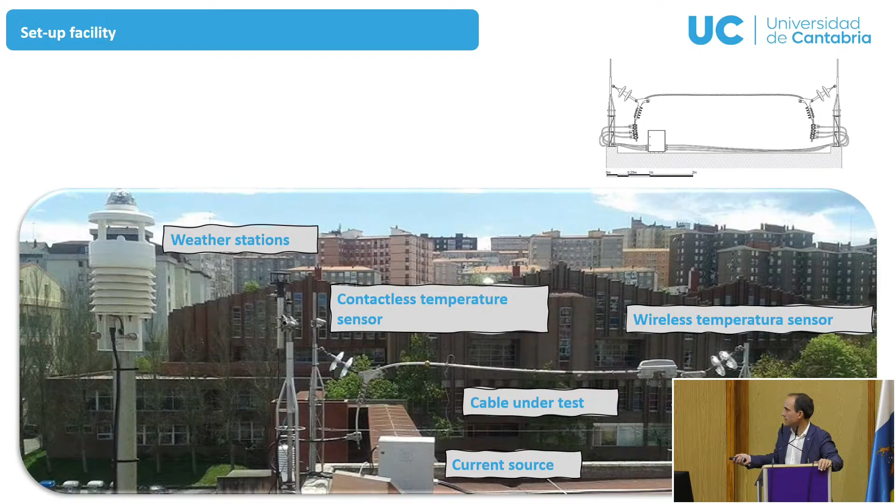For instance, weather stations. Here we have two integrated weather stations that are used by Viesgo and by EDP. And this is a conductor temperature sensor, a wireless temperature sensor used by Viesgo. At the same time, we are also able to test other developments proposed by our research group. Okay,

basically, and you have more details in the paper submitted to the conference, we designed a prototype in which our objective was to keep it as small as possible, while avoiding the lateral effect on cooling due to the auxiliary elements.

So in the central part of the conductor, the temperature can be considered more or less stable. So we can use this part in order to evaluate the behavior of the overall system. Okay, this is an example in which we test a heat sink element that can be used to extend the area, and with a contactless temperature sensor, we are able to measure the temperature of the conductor without any element in contact with the cable.

This is suitable for applications, for instance, in substations, or in applications in which we are able to link or connect this sensor to the IT network of the utility. Yeah?

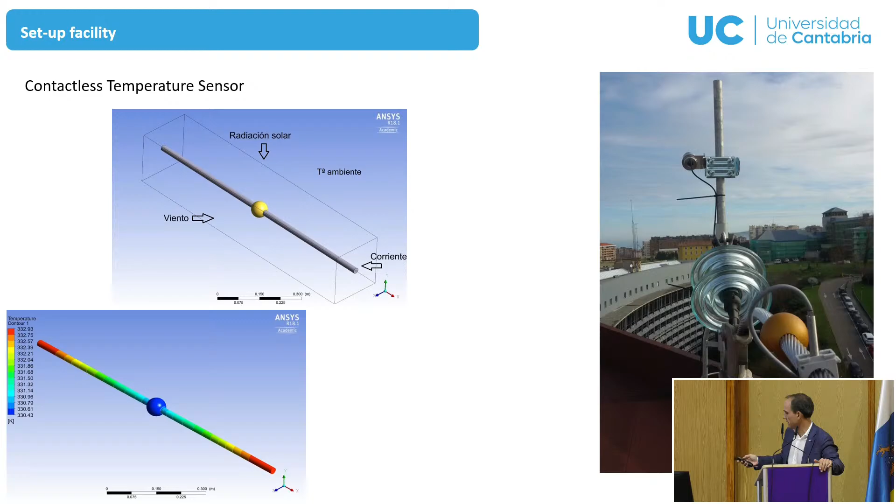Okay, so the other part that is interesting for us is the architecture of the system that is able to collect and manage the data. We have designed a data-driven system in which all the data is stored in a SQL relational database. Once the data has been stored in this type of system, it is possible to analyze and explore the data by means of any tools you consider, like Python or MATLAB or any other.

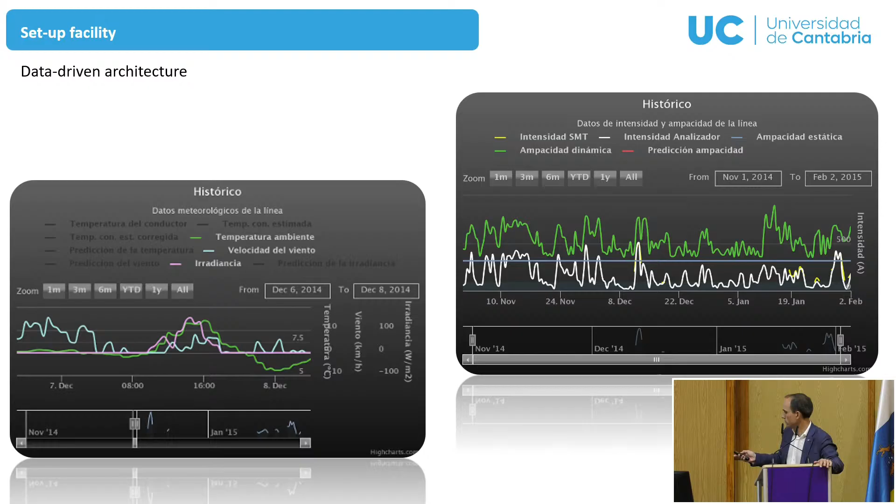Okay, this is an example of a website application in which we are able to publish the results. And finally, this is work that has been carried out by a PhD student, who is the corresponding author, and is a doctoral thesis that is going to be presented in the next month. Luis studied the behavior of a high-temperature conductor in order to test if this conductor is suitable or if the standard can be applied in this case.

Okay. So just a conclusion, the prototype has been designed with a particular focus on aluminum conductor steel reinforced, but it can be extended to other technologies, with a current that can be increased above 1,200 amps. The prototype is very easy to use. Of course, it has several limitations.

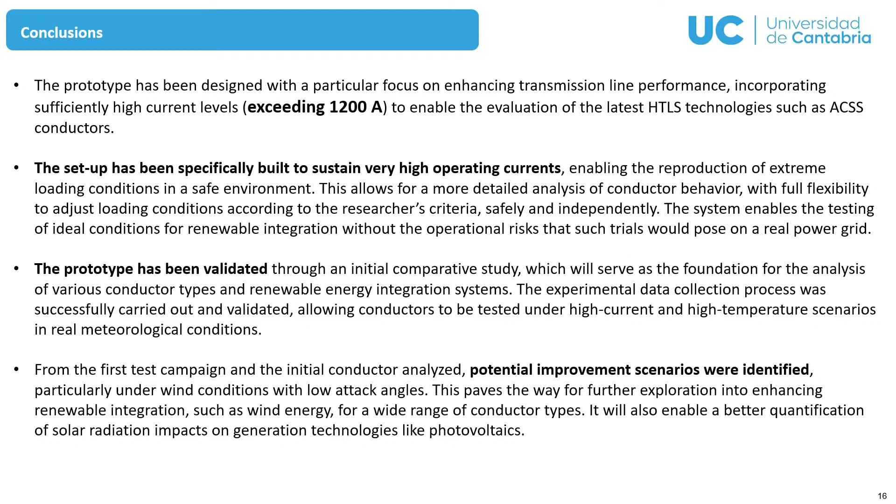The main one is related to the fact that the weather conditions are the ambient conditions in the place in which the system is installed, but as the weather conditions are similar to the real conditions of the Viesgo, that is the DSO of our area, this is not a big problem, a big issue for us. And that is mainly everything.

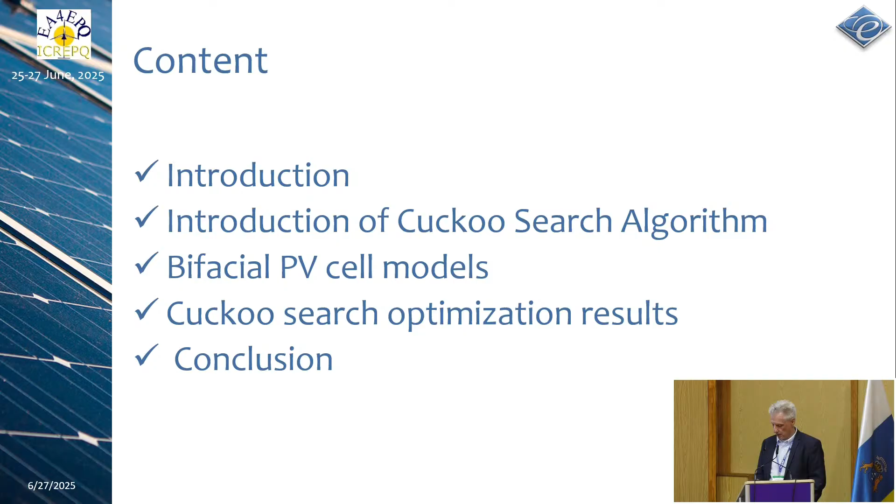The increased installation of PV systems in Macedonia, as everywhere in the world and in Europe, resulted in an excessive power. And because the number of installations was growing very fast, and the PhD student is working in a company that designs and installs PV plants in Macedonia, they came to a situation where on certain days in the year, regarding the climate conditions, the production of the PV plants exceeds the designed value, and the inverters just switch off.

And the idea was to take into account different meteorological conditions, temperature, solar irradiation. For example, when they designed the photovoltaic plants in Macedonia, they take about 1,000 watts per meter square, or a little bit above that. But they found out that on some days it can be up to 1,400 or 1,500 watts per meter square due to the different weather conditions, wind, clear sky, low temperature, and their power production exceeds the designed values.

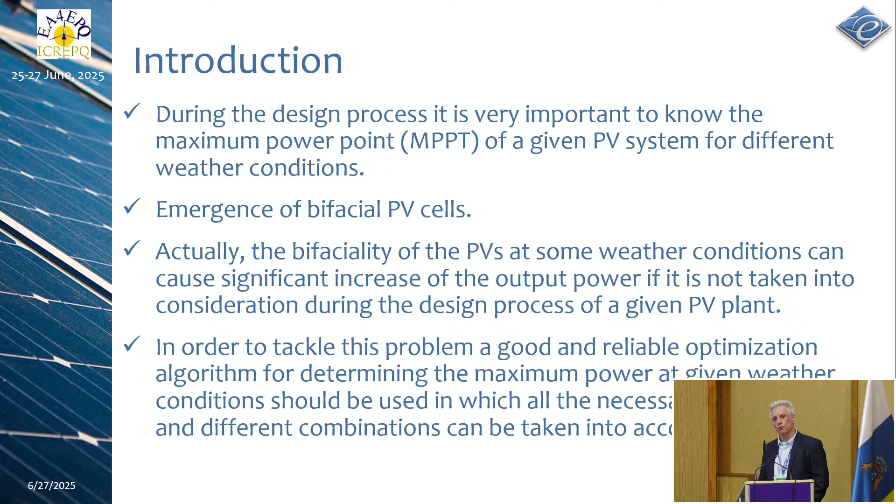So we decided to find a methodology to predict some of those conditions and help in the design of the PV plants before they're installed on a certain site. Of course, the emergence of bifacial photovoltaics is now also an issue in Macedonia, because they're installing more bifacial rather than single-faced PVs, and they add extra power, as we will see further on. So we decided to do an investigation in this area to see how we can predict the produced power by using different cell models, as I will explain later on.

As you all know, the optimization methods started first with deterministic methods, with all their pros and cons regarding their usage. Then the stochastic methods became more useful, and they have been used for many years for different optimization problems. So we decided to use some of those. The cuckoo one is the one presented in this paper, but we have used different methods from different groups of nature-based or inspired algorithms. So we've tried genetic algorithm, cuckoo search, teaching and learning, gravitational search, and I think another one, but I can't find it here.

So different methods. Why? We started with different methods because there are some papers introducing the no free lunch theorem, which in optimization application states that there is no particular method for a particular problem. So you have to search with the methods to find which of those is most suitable for the problem you're analyzing. That's why we try to use different methods and different cell representations to find which will be the best match for this investigation.

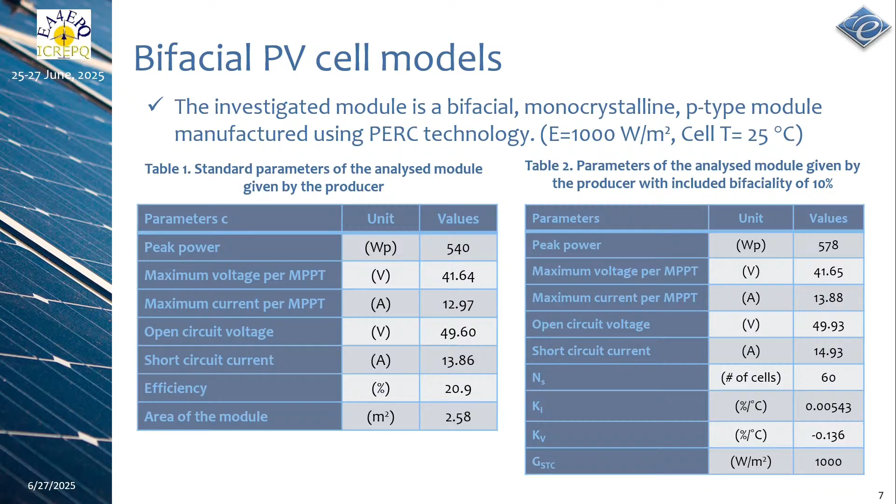On this slide, we have the producer's data given for the single side, if you're using one side, and what happens with the values of some of the data when we use the bifacial photovoltaic cell using the other side with a bifaciality of 10%. Now, this percent changes due to the type of the surface that you have under the PV plant. It can go up to 20% when you have a nice white surface that is glowing a lot and reflecting the light coming from the sun. So that's the best solution. So 10% is somewhere in between.

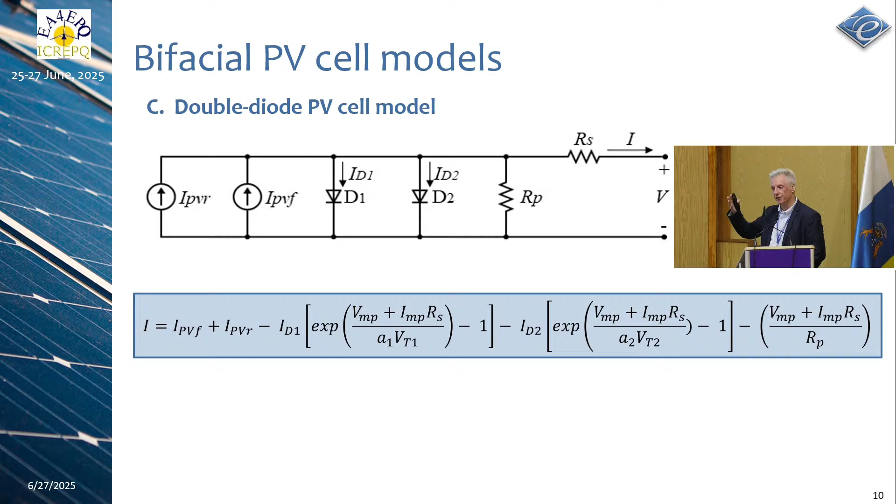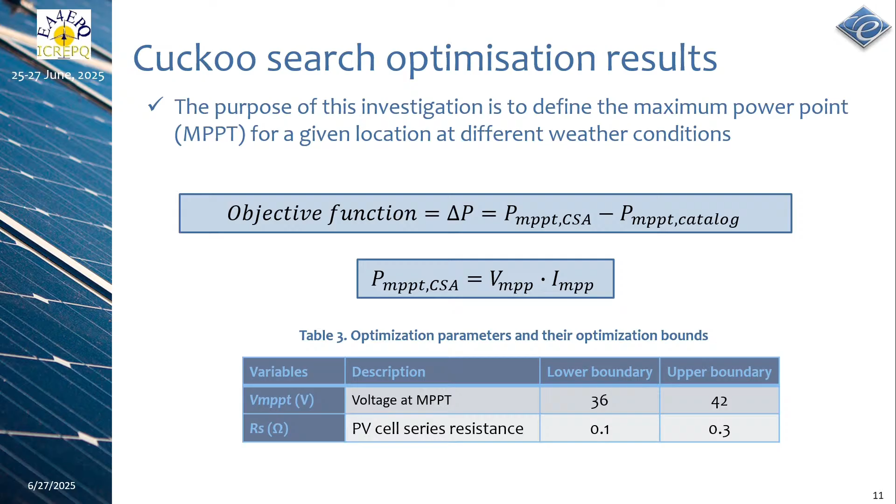The objective function of the optimization is the power difference between the maximum power point calculated by the Cuckoo search algorithm and the maximum power point given by the producer in a catalog. We try to minimize the difference between those two powers, where the power of the Cuckoo search is calculated taking into account the voltage and the current that is calculated. The voltage is the variable parameter. So in this optimization, we have only 2 variables: the voltage and the series resistance.

As a starting point, we try to calculate the value of the series resistance, and it's in the middle of those 2 values. That's why we use the lower and the upper value to be between 0.1 and 0.3. It depends on the characteristics of the PV cell, as well as the solar irradiation. The solar irradiation changes the value a little bit. So that's why we use this parameter. And this parameter is changed only in the second and the third model. The first model doesn't have this series resistance, and there only the voltage is the variable parameter of the optimization.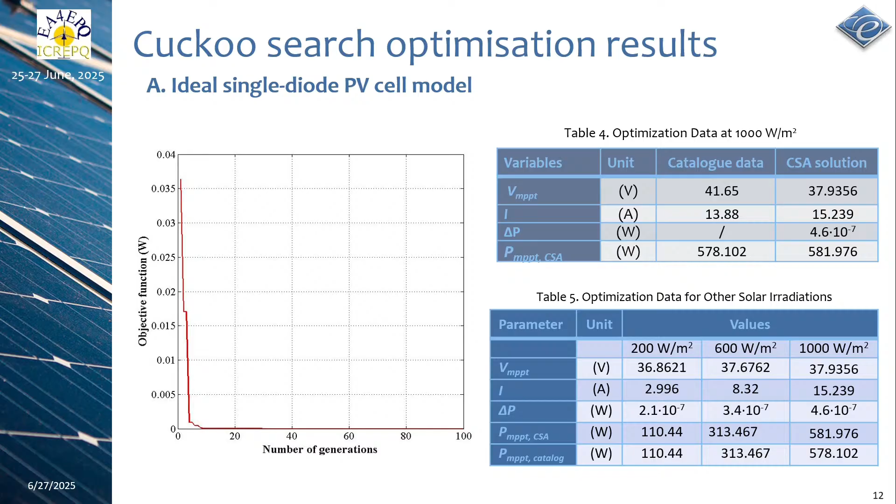As you can see, the optimization results, or the power of the maximum power point, is reached very close. The difference is in a large number of decimal points, so we gain almost the same result as given in the catalog. I can say that this is not the case with other optimization methods. So this method shows pretty good results regarding, for example, genetic algorithms. So it means that the algorithm also can be a case to study later on.

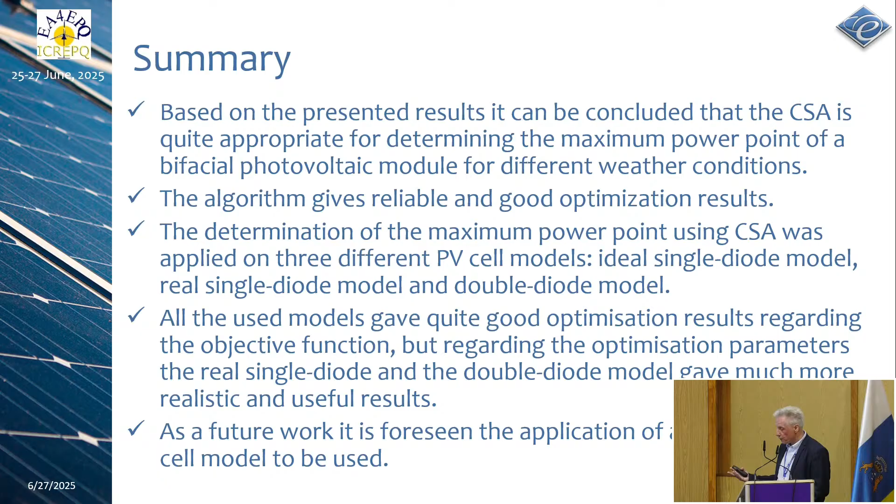So for our future work, the candidate will try to use maybe a 3-diode model to see what results we'll get from this presentation, as well as the optimization methods that I have mentioned will also be used, and then we'll be able to compare the results and see which model and which optimization method is suitable for such an investigation.

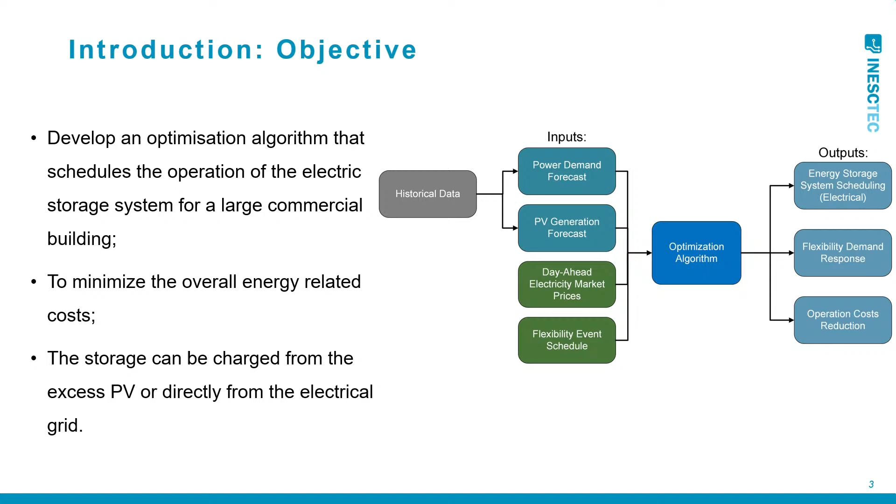So our goal is to develop an optimization algorithm that schedules the operation of the electrical storage system in the next day, in the day ahead. It is based on power demand forecasting and PV generation forecasting. And then we have the optimization algorithm, and the results that I will present here today are related to the energy storage scheduling in order to minimize the operation costs.

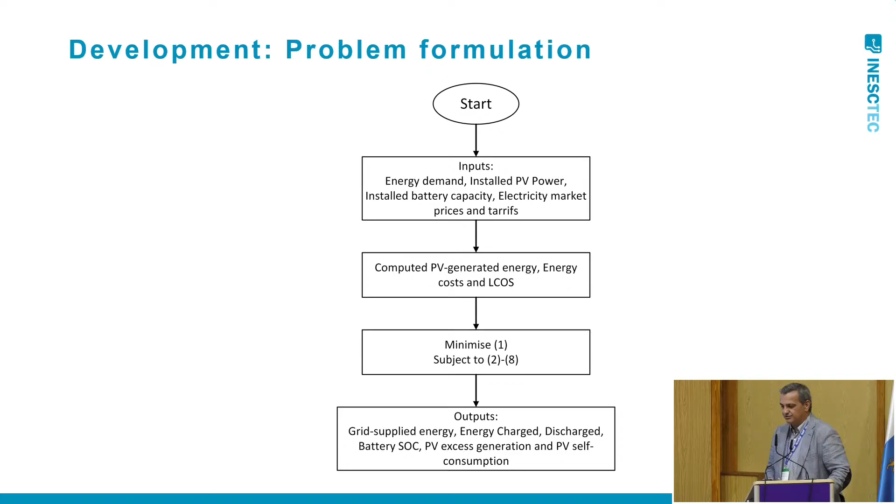The optimization problem was formulated as a mixed integer, implemented in Python using Pyomo, and the solver that I present here, we tried other ones, is CPLEX. So the problem has inputs such as energy demand, installed power, battery capacity, electricity market prices and tariffs, and then there is the computation of the PV generation energies, energy costs, the LCOS, and the minimization of the objective function.

So the objective function was this one that aims to minimize the energy-related costs of the operation of the system. And we introduced the LCOS, as I will present after, as a penalty factor in order to reduce the number of cycles of charging and discharging the system. There are several constraints to reproduce the physical and operational behavior of the system.

And we considered the Iberian market marginal cost of energy, the grid access tariff, and the average peak power charge, and we summed all of that. And then this is the levelized cost of storage that we use in order to reduce the number of cycles of charging and discharging of the battery.

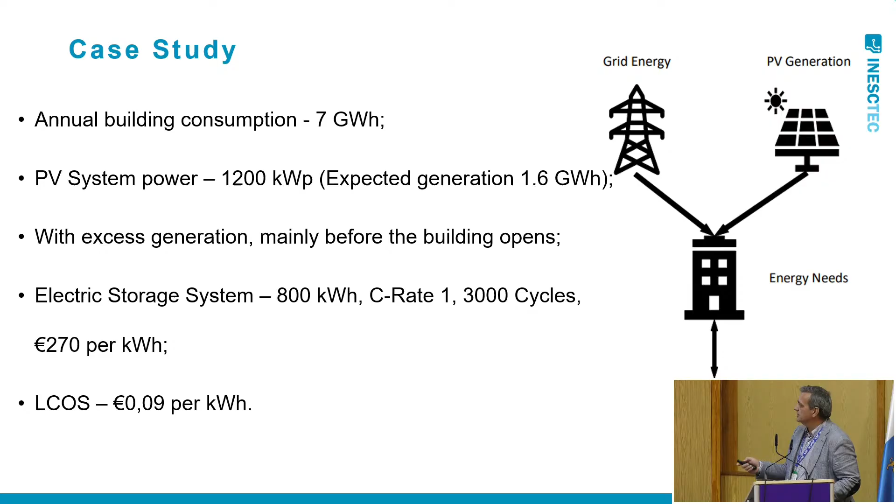So our case study was a shopping center with an annual consumption of 7 gigawatt hours and with a PV system of 1,200 kilowatt peak with excess generation, mainly before the building opens, and the electric storage system with 800 kilowatt hours.

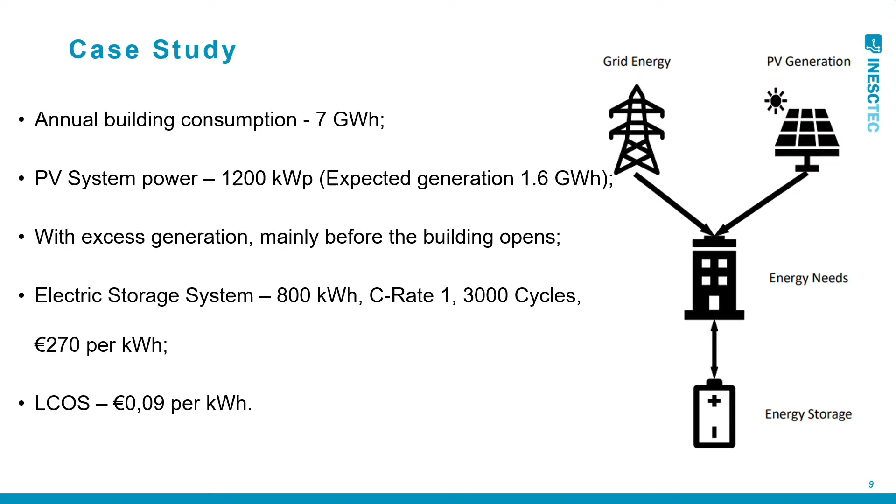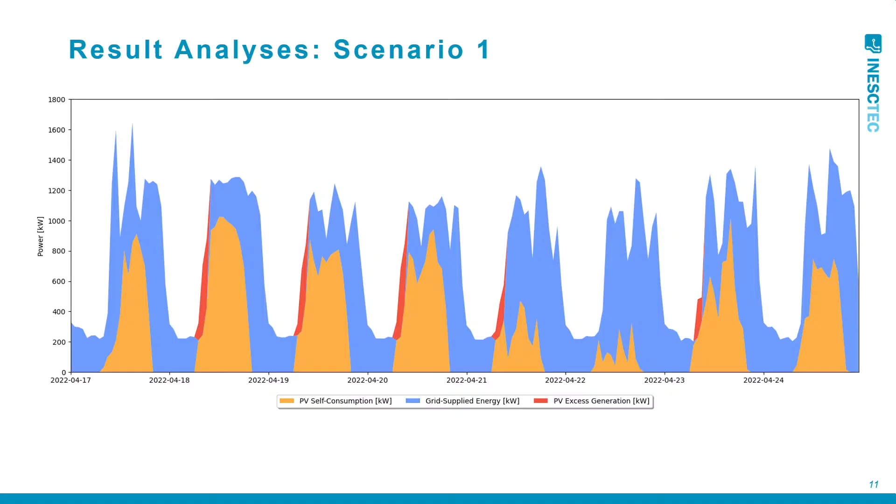So we analyzed 3 scenarios: the base case, the baseline scenario with energy demand and PV generation without any kind of optimization algorithm. The second scenario was related to the energy demand and PV generation, but using the optimization algorithm without the LCOS penalization. And the last one was including the LCOS penalization in order to increase the lifespan of the battery. Here we have the graphic for our simulation using historical data, and we can see that we only have PV excess generation during the morning in these times, and not every day.

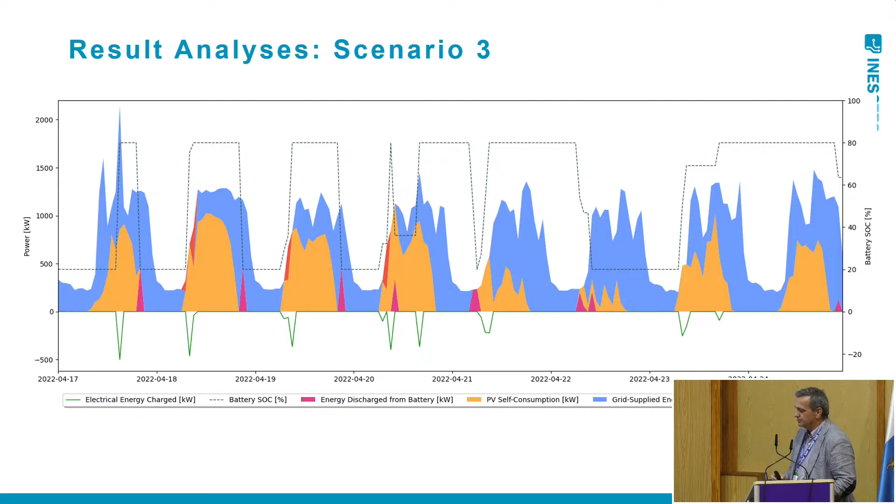When we apply the optimization algorithm, we see that the system will charge and discharge the battery according to the prices of the grid, but there are lots of charging and discharging cycles that reduce the lifespan of the battery, leading to the replacement of the battery. So we included the LCOS, and we see that the charging and discharging cycles reduced significantly, and sometimes there is energy conservation from one day to another, and the lifespan of the battery systems increased a lot.

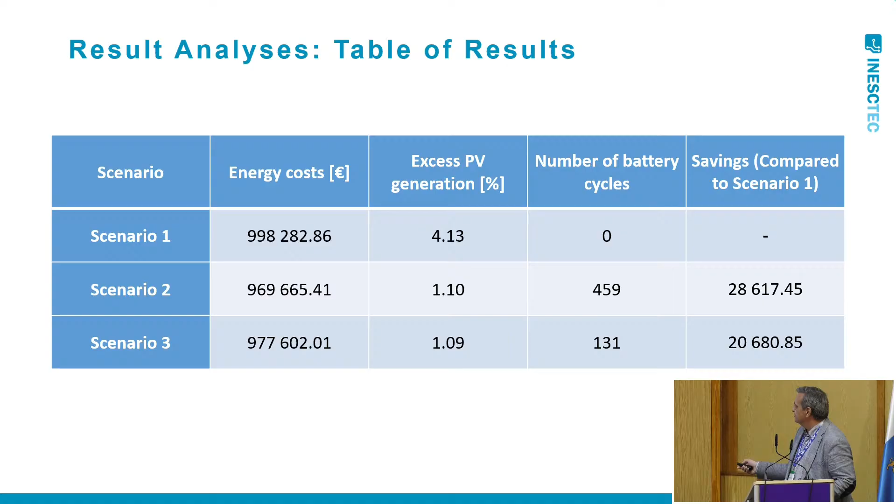Here we have a summary of the main results. We can see that the number of cycles is reduced when we apply the penalization factor. The savings reduce slightly, but since we don't have to replace the storage systems, this is the best option to operate the system.

As main conclusions, the algorithm schedules the operations of the energy storage system for the following days. There are considerable savings achieved by taking advantage of the market electricity prices, and the implementation of the levelized cost of storage improved the performance, reducing the cycles, maintaining significant savings and enhancing the viability. As future work, we are now working on modeling the energy storage system degradation over time, and the implementation of the option for selling the PV excess generation when it is an advantage compared to the storage of that energy.

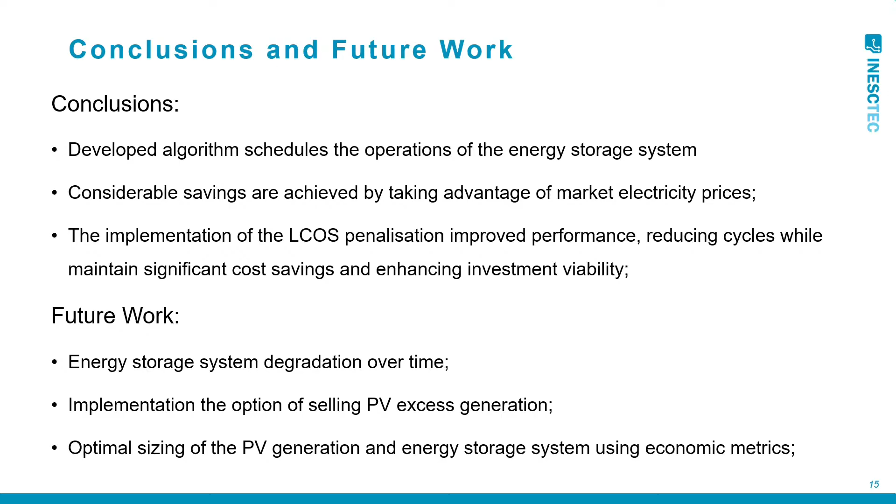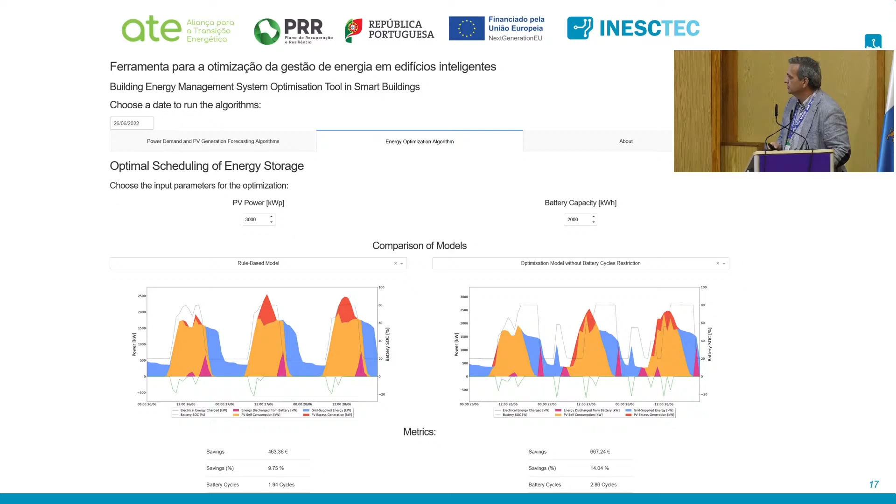Here I can show you the platform that we are developing for simulating this. And now we are working to put this in near real-time operation. This is the layout of the application that we have now.